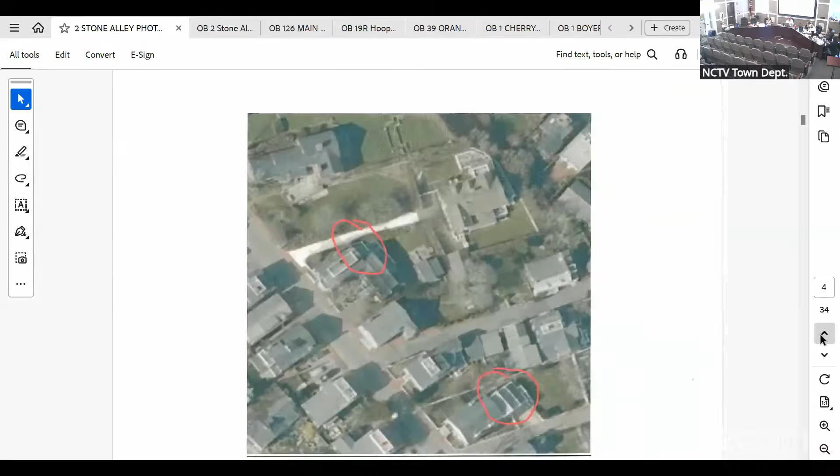I can't do anything without it up on the board, though. They've seen the pictures, it's just the plan. Well, to be clear, the elevations. Yeah, I think that's probably the other attachment. There we go.

All right, can you zoom in on that one? Yeah, there you go. All right, Linda, why don't you - there were a couple of other trim pieces that were sticking out, they had a higher profile. The piece below it that does stick out somewhat is the integrated gutter system in that back room. But we reduced the other fluffy things that were on the trim, I think that was the biggest issue. Subdued it, and then shortened the railing and set it. So that's where we are this time.

All right, does anyone have any questions for the applicant's agent? I do, Mr. Chair. Go ahead, Ray.

What was previously approved on this? Just a flat roofed element with nothing. Oh, there was no deck? No, there was a deck, but you'd fall off it. Well, huh, if you put it that way. If you weren't careful, yeah. Okay, I thought I remembered approving a deck rail up there, but I'm mistaken, obviously.

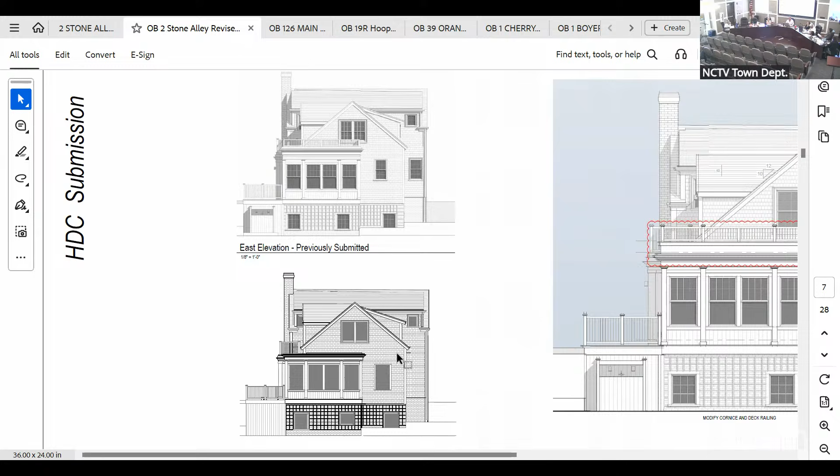Yeah, because the mock-up was actually set back from the front plane, from the east side. It was set back halfway through that flat roof deck, and nobody thought that was appropriate either. It would have looked very strange. So yep, that was the mock-up that was up there.

Okay, who'd like to express their concerns or comments, please? Well, I'll go. I seriously have driven by, slammed on the brakes, and looked up to see from Union Street what you can see of this house. It really is not significantly different at all from any other house.

This iteration seems to have a really wide band that would be white. Is that a problem? I'm not sure. It looks like 75 other iterations on the street. I guess with regard to this house in particular, maybe the best solution is just to have a parapet roof. Then it looks like a roof, you don't see any railing, end of story, they get their deck. But I am not opposed to this at all. I think it meets the criteria in the neighborhood.

Thanks, Val. Now, let's see. Ray? Yeah, I can go. Thanks. First of all, I've been walking down Stone Alley a number of times and have always meant to call or text Matt to compliment him on how this all worked out, because I, like Val, agree that after all those years, we have something I think is very appropriate to that area.

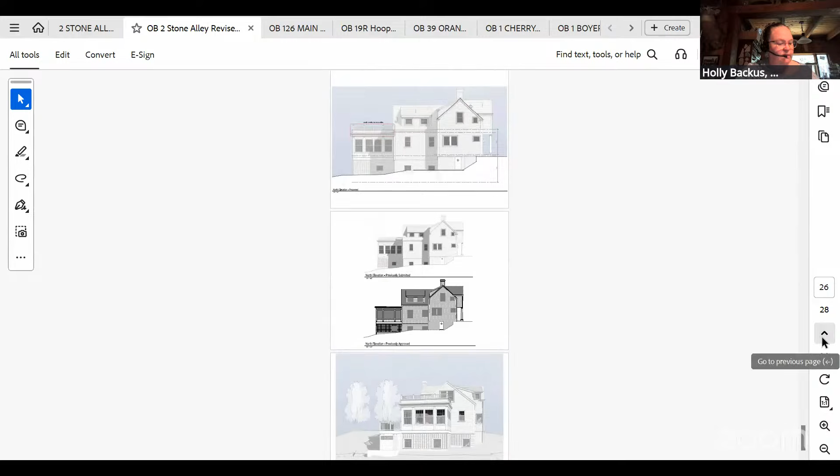Thank you, Mr. Chair. I guess I would just guide you all to look at the May 26, 2026 minutes, which I included in my comments, that commissioners at the last meeting stated that all the current options required additional refinement before the application can move forward. I thought there was going to be options provided in addition to what was provided with this revision. I specifically mentioned that the cap detail is not appropriate, per your 2024 review, back when the deck was originally submitted, and you all mentioned it was disproportionate and drawn unnecessarily as an attention, but maybe that is a moot point now. So those are my comments.

Thanks, Holly. Abby, back to you. Oh, actually, Angus. So thank you for that. When we're trying to be planned and read the comments ahead of time, and there's a large agenda or a lot of comments, you can't always remember those, and sometimes commissioners aren't able to review these beforehand, so it's nice to have the comments fresh in our minds. But one of the points is that this was basically reviewed and rejected, and I don't know why we're looking at it again.

This is something that would be character defining on the houses used for examples, but it's not this barn-come-residence. It is a character defining element, and it's a prominent element on a very unique stone alley. There just aren't very many paths like that in town, and this is definitely affecting what you're seeing there. Thank you. Thanks, Abby.

For me, it's a lot of balustrade. Is it also on the, can we see the other elevation of the stone alley side? There's nothing on the stone alley, it's all on the south side. That's already been approved and built. No, well, this face is Union Street, this elevation. And then you have it on the south side as well, right? Yeah, that's already approved and built.

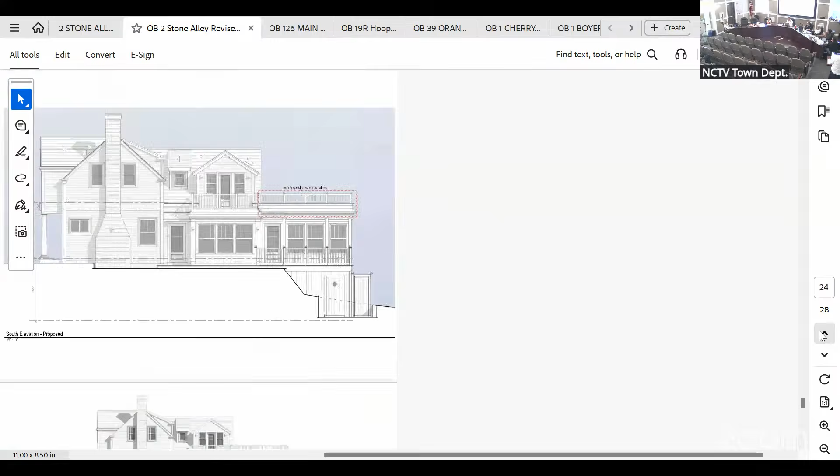Thank you. All right, can we go back to the original elevation you showed? Yeah, and can you slide over so we can see the one on the left too? It's on the left. Oh, that's a different picture. I think these are the reduced 8.5 by 11s. No, go south, go the other way. Actually, that was a good one, back down there. Matt, this is going to show us all of them. Yeah, can you zoom in on that? Yeah, a little bit more please.

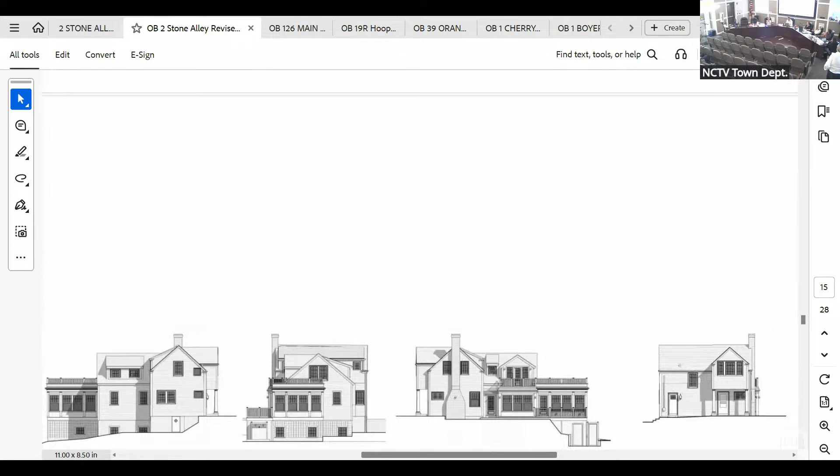All right, so if I had my druthers, retrospectively, we would have requested that the ceiling height be a foot lower and that the deck be integrated and then railed. That would eliminate a lot of the problems we're facing currently. But we're not going to go back in time, and we're not going to have you rip the roof off.

Could I just add one piece of critical information, because we actually did step it down. Yeah, so the first floor and the second floor step down two risers. I know, I knew you did that. I recall we discussed it at length. Yeah, and just a testament that, despite what you might read, the HDC process is very successful, at least a good portion of the time. It might take a little longer, but ultimately you come up with something you can go by and look at in a pleasant way and be happy that it's part of the historic character and setting in Nantucket.

But in any event, Matt, this has got too much. To me, it's taken on its own identity and it overtakes the structure with the proposed modification.

It's a lot of railing to be up there. It is, on the other hand, as Val and others have stated, something that's not, you're never gonna see this way. The only way you're gonna see this is looking up at a distance from Union Street, and closer up at Stone Alley, but I think it's obstructed by cypress, isn't it? Yeah, which, by the way, are probably the most inappropriate plant for that location.

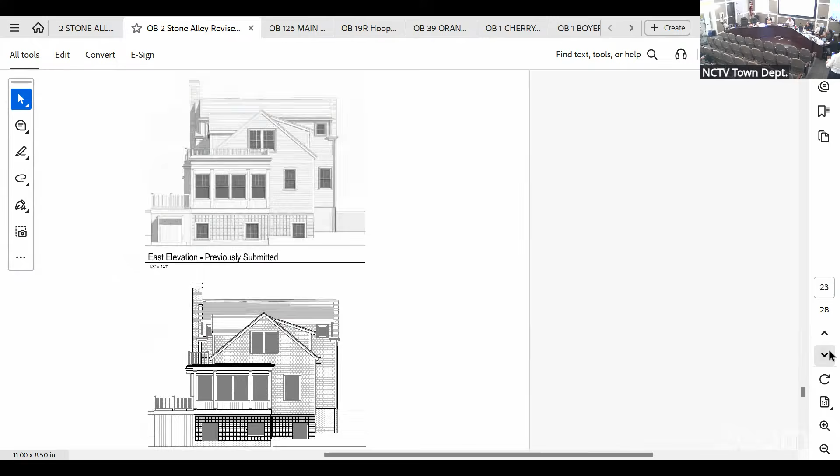Can we go, Matt, can you direct Fiona to the antecedent, the prior submission? Sure, I think it's in Linda's packet. Is that in your packet, Linda? I don't know if it's in the packet because it's in the file, and I saw it in here, I just don't know what sheet it's on. We had 3 options in there and they're not up here. I was talking about the precedent photos of others, similar, there's one, yeah, they're before this.

Go a little slower. I think we went up. I'd keep going, I think maybe.

Because I just want to point out, Steve, what you mentioned, when you're standing down on Union Street, you're looking up at it, so you're going to see a fraction of that railing. Yeah, no, I understand, Linda, thank you. Can you go down one sheet, 2 sheets? So it's not going to look as obvious as it does right here on flat.

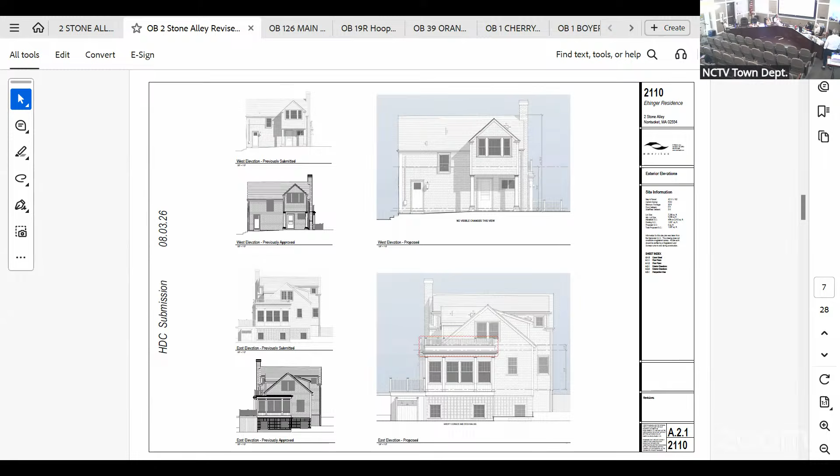And can you go to the left side of the lower 3, the smaller ones? I think that's the one I'm looking for. Oh, yeah, scroll down again a little more to get, no, yeah, keep going. Yeah, Matt, no. 2, there you go.

Matt, this one looks more appropriate to me with the breakup. I'm of 2 minds: one is that we want it to not overshadow the home. The other is that, according to Secretary of the Interior standards, it should actually not look like it's part of the original structure, in order to preserve the integrity of the character of the original structure. So I think I'm more okay with this, given 2 important factors.

One, this view is only from Union Street and it's only a portion, a sliver of it. And two, the stone alley, I would suggest, if we were to approve something here tonight or even in the future, has to have a not visible or filtered visibility at time of inspection and thereafter, and strongly suggest the applicant consider a more appropriate planting material.

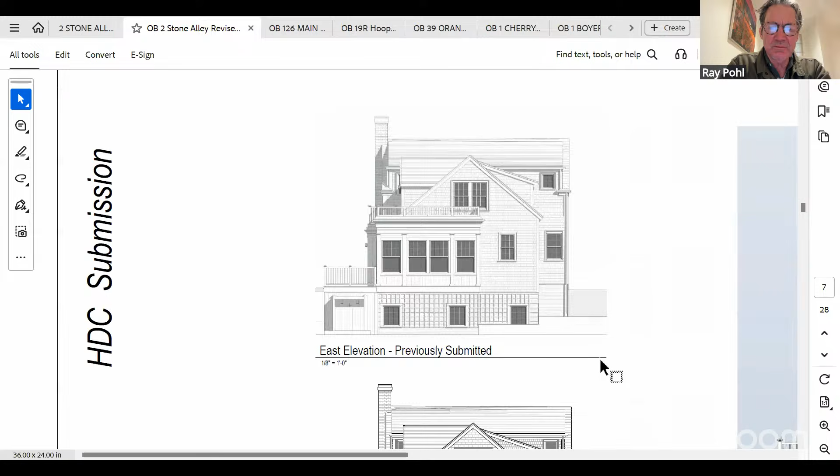up to the bottom of the baluster, is it all white, or is there shingle in there? All white, it's all white. I just think that's a lot of white, and I think there are other ways it could be handled where it doesn't need to be all white.

Could I make a suggestion? Perhaps a hybrid where we add more ornamentation but slightly increase the railing height? A combination of what Ray's suggesting and what Steve is suggesting in terms of the ornamentation — the buildup looks better in this version, but by increasing the railing height and slightly minimizing this level of detail, it might be a hybrid of the two. Just a suggestion.

Well, Matt, I think you've got consensus that it needs to be modified, and you've got the comments along the line of thought you're stating. The shadow line created by the gutter and the angle of the upper trim, I think, cannot be understated in terms of its benefit.

So can we get a motion? Can I just ask a question? Can we go to his presentation, page 10? I think it's on this page. Page 10, yeah, it's right there. So what I'm suggesting is for here to just be roof shingles.

Val, we did that and everybody hated it when we brought that in. It wasn't quite that, it was shorter than that, but it's just about mitigating the white for me.

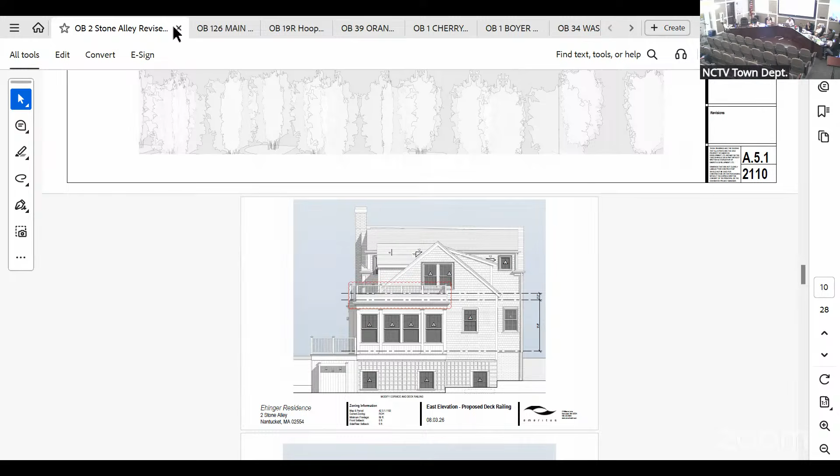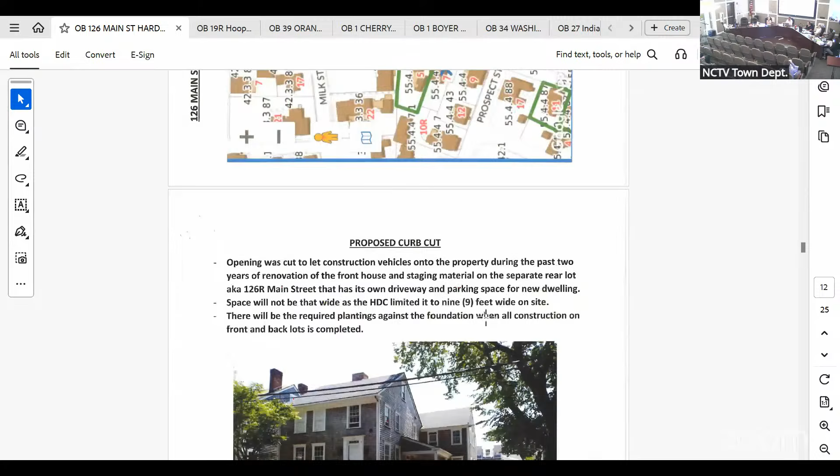Hi Chip, how are you? I'm well, thank you. Chip Stahl, representing the owner, 126 Main. We're returning after it was previously approved, and we came in with an application for side-by-side parking.

We've done away with that, we have single car parking. We listened to the commission on the last one, greatly reduced the amount of hardscape and hard surfaces. We reduced the rounding at the street curb cut from 15 to 13 feet, which is what was previously approved. We also reduced the hardscape at the top of the driveway, eliminating the cobblestone landing off the top of the stairs, the walk downstairs to the lower level. We reduced the brick landing at the entry steps, which is needed for a hard surface for usage, including since the owner has 2 handicapped people in the family.

We're doing substantial planting along the west side of the house, between the parking, to soften the appearance and reduce the wall at the town tree, which was required by the town arborist, but we reduced it to what was previously approved. We also changed from brick on the driveway to cobblestone runners, which Holly had suggested was more appropriate.

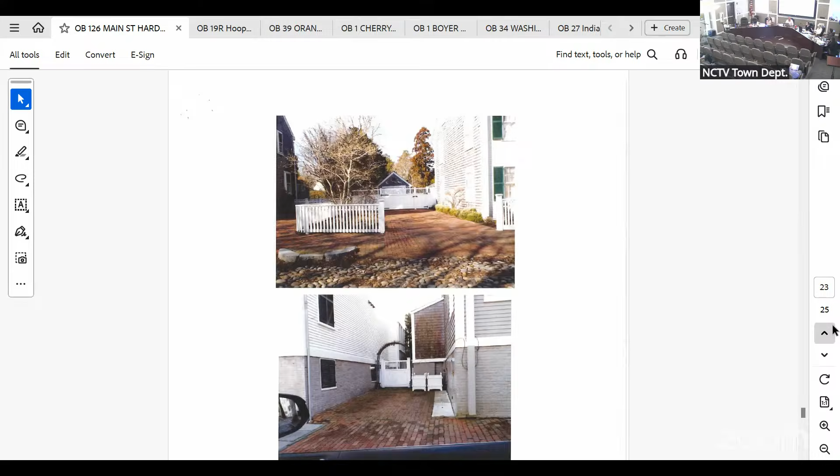I'd like to note that this is the only property, as of right now, from the bank to Caton Circle without its own driveway. As evidenced by the photos, most others have significantly more hardscape surfacing, including our abutter at 128 who has far greater hardscape for their driveway. We have a conforming lot, conforming frontage and ground cover, and it's in need of a parking spot.

We're asking for one parking space when the select board has asked for two. When we were here before, there was support for the full 20 by 9 parking space, and not the one also allowed by the bylaw of 9 by 17, which is why we are back at the HDC.

Thanks, Chip. Questions? This is Joe, I have a question. Go ahead, Joe.

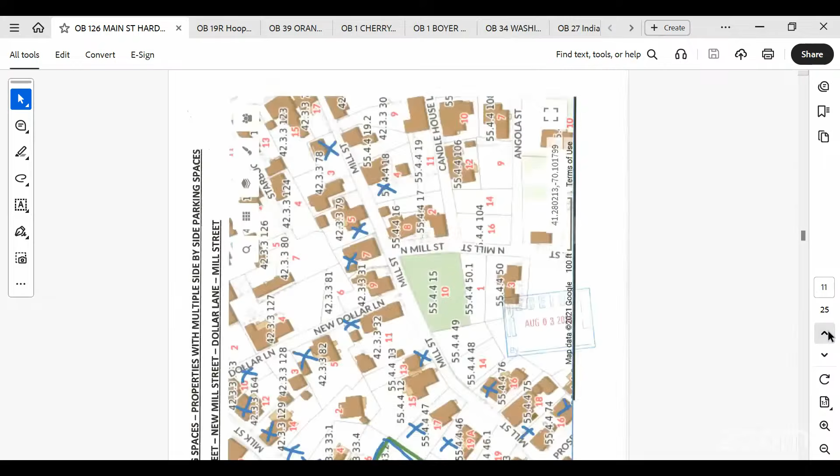I just listened to all these changes that were made, and I don't see any graphic evidence of a before and after, or anything clouded. I don't know if I missed it or not. There's one site plan here, but I was curious what the previous plan had looked like, since it had been a while since we'd seen it. Is there a before plan or not?

Hold on, yeah, there should be a before plan in the packet. It's in another packet. Yeah, there should be another one. I can tell you what that was.

There was cobblestone at the base of where the basement goes down. We took that out. The brick landing was larger, and the rounding was 15 feet, so we would have had to circle the whole thing, Joe. It is 9 by 20 instead of 9 by 17, because the select board was not happy with the fact that, even though it was by zoning, they wanted it 20 feet deep. So the forward part of the brick landing for the stairway, which is the primary entrance to the house, got smaller and shorter in square footage — I think it's like 36 square feet or something, I can't read it from here.

So we've removed some cobblestone from the house. We're going to plant between the parking and the house to soften that space, and some of the ones up there in that area are completely wide open with no softening. We also reduced — Holly made a comment about the 15-foot rounding, which is now back to the original approval, which was 13 feet. Does that answer your question?

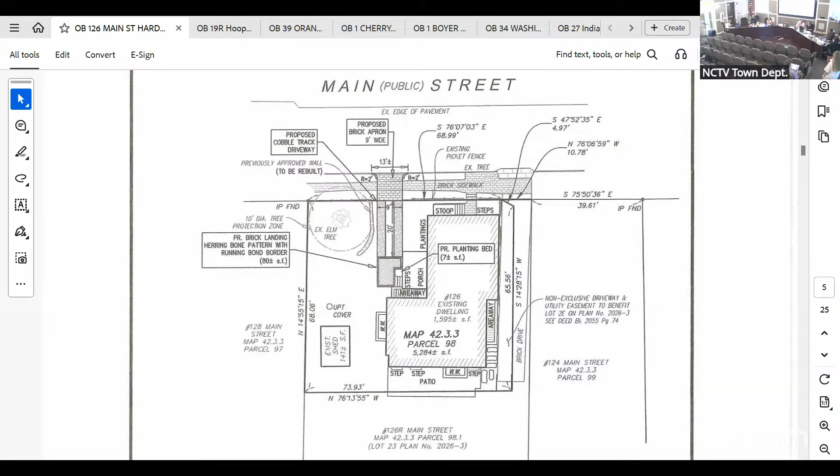Sure, I can comment. I'm looking at — thanks Holly — for pointing out that the previous plan is there.

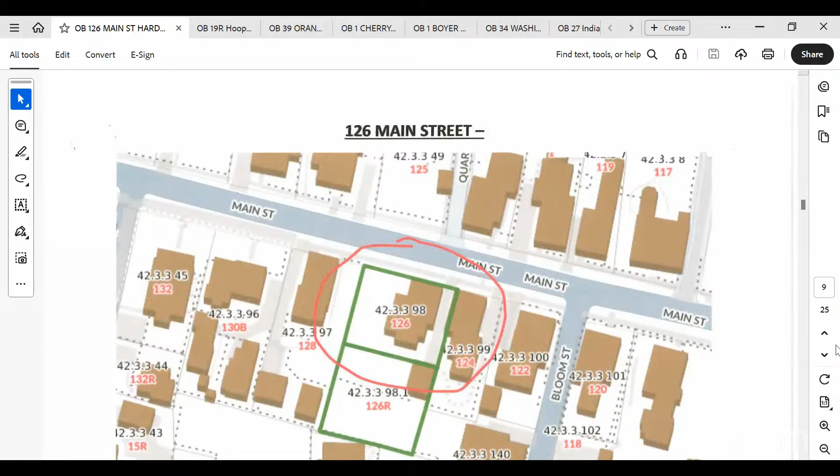I think the applicant makes a good point about the number of driveways—almost every property here has a driveway along Main Street, most of them right up against the house. The previous HDC approval has the driveway right at the house, and the current proposal shifts the driveway towards Upper Main Street, towards the town tree.

I understand there's been an effort to make sure the town tree isn't affected in any negative way. So this, I think, feels like we're going to get more green space between the house and the parking area, and of course the tree in the parking area.

So I actually think this is an improvement over the previous approval. Even though the driveway is longer, and the brick landing being as far back as it is definitely means more square footage of hardscape, I think it's only a dramatic impact when you're looking at it in a site plan or as the crow flies.

As you're walking along Main Street, the fact that this driveway is buffered from the corner of the house with plantings means the length of it is going to be mitigated, and I appreciate the cobblestones with the plantings in between. So I have come to feel that this is appropriate given the evidence the applicants provided, and it fits in the context.

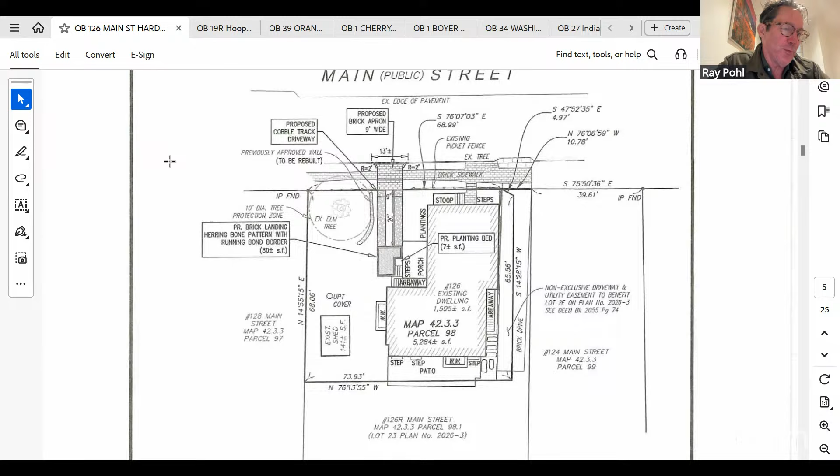Here's the board: myself, Angus, Abby, Stephen. Oh, interestingly I have 6 people listed as regular members, so that ain't quite right. Can we correct that? Yeah, let me see if I can find it. Hang on one second, sir.

I got a little overzealous with the sitting board. I have a feeling that maybe Connie might be an alternate. I have it right here: it is you, Ray, Stephen, Val, Abby, and Joe. Perfect, thank you.

Thanks, Fiona. I want to recap that: myself, Abby, Stephen, correct? Joe. Angus is the other one? No, Val. So is the agenda incorrect?

Hang on one second, let me just check. So the sitting board from what 19 Hooper Farm brought in, it was Ray, Stephen, Val, Abby, and Joe. I have from my notes, Ray, Abby, Stephen, Joe, and Connie. Let me see if that was correct -- and that's not what's on the agenda. Val was missing, I think.

I'm gonna go get some water. Hang on one second, Val was missing that meeting. That was July 28th, she was absent that meeting. Yeah, Mr. Chair, I can maybe help clarify. Oh, that would be wonderful. Thank you very much. Yes, so to reiterate what Kathy just said, Val was missing the previous meeting.

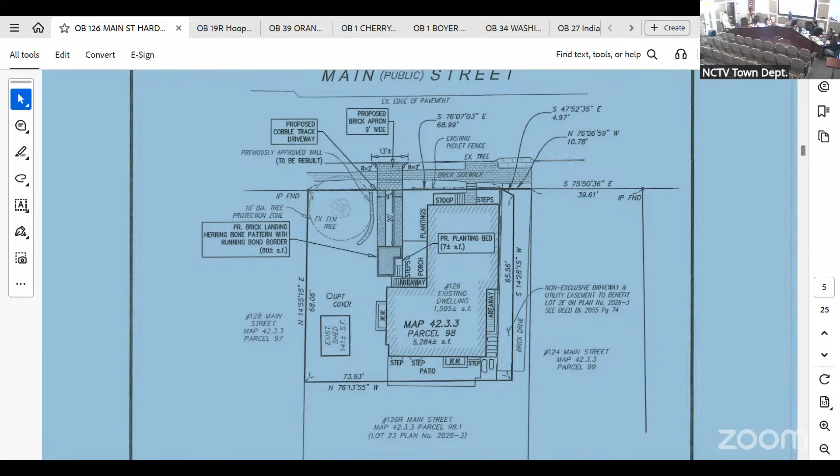Prior, okay, stepped down. Let's run with it, all right? Okay, now that we've established the board, sorry about that.

Reed, what can you tell us? I just requested to share if possible. Thank you. You're all set, Reed, great, thank you. Okay, so good evening everyone, my name is Reed Yenor. I'm here representing 19R Hooper Farm.

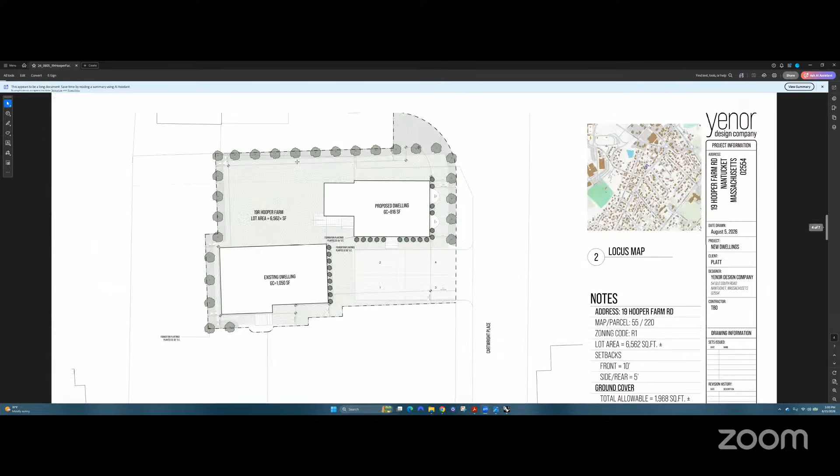Before I begin, I just want to give a little context to our submission history. This is my third time before you with this application, but it is our first round of revisions due to a request for additional information on the first round. So this is the first round of revisions you're hearing tonight, and I will begin describing the changes. In general, the commission's concerns were the building scale as well as the distinction or character of the structure itself. This is the site plan, of which we have not changed the location of the building, and I will speak to that as we discuss the other context previously brought into the conversation.

In terms of the structure itself, the revisions made are primarily focused on reducing the scale of the structure. Those include reducing the eave height by 18 inches, bringing in the dormers from the gable ends by about 6 inches, and integrating the frieze board of the dormers with the head casing of the windows, which allowed us to reduce that dormer eave height by an additional 6 inches, bringing the gross reduction to 2 feet. I hope you followed that -- I apologize if that wasn't clear. What that also does is increase the distance of the contact point between the dormer and the ridge.

The other, more aesthetic revisions made were in response to a request for an increase in fenestration, particularly on the front of the structure. Rather than increasing window size, I increased the number of windows to present a more typical 5-bay structure. The door casing was also increased to a 1x6.

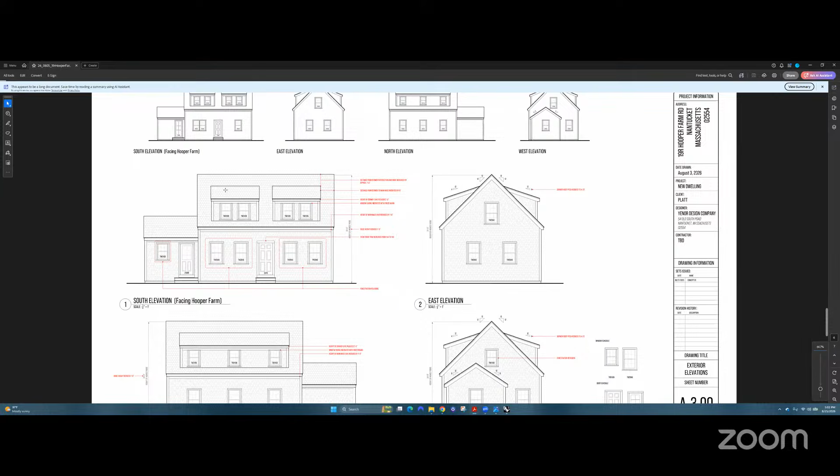We've added a window on the secondary massing, and the side door of the secondary massing has been changed to a 2-panel door with 6 lights above, as opposed to a full 9-light door. Hopefully that presents, in your opinion, a more traditional secondary door condition.

As far as revisions to the other faces of the building, they are consistent with the structural changes in regards to the eave height of the dormer, the eave height of the main mass, and the overall ridge height, which again has been reduced by 18 inches.

The other comment that was made was in regards to the alignment of the second floor windows. The windows on the gable ends were above the windows of the dormers. That has now been made consistent.

So when it comes to the streetscapes, which have been the primary focus of this conversation in this application, I want to point out a few things here. One is that there was a comment made by Commissioner Welch about questioning the orientation of the structure.

I want to make a note about Cartwright Place, considering this is a corner lot, which is a dead end. While I completely respect that that's a public way and can be seen from Cartwright Place, I think Hooper Farm is the primary concern for impact on the public way, as that's really the traveled way along the street. So with that in mind, we decided to keep the orientation of this structure because it provides the farthest distance that the ridge exists from that street, from Hooper Farm, if you will.

The structure itself is about 107 feet from Hooper Farm. If you take a look at the revised streetscape, reflective of our diminished scale, I think that in combination with the reduced scale of both the ridge and the dormer height, when considering the perspective of a 24-foot tall structure that's set back about 107 feet from a road, this produces a less impactful scale to the streetscape than if it was perhaps rotated 90 degrees and the gable end was closer to the Hooper Farm Road location, or street, if you will.

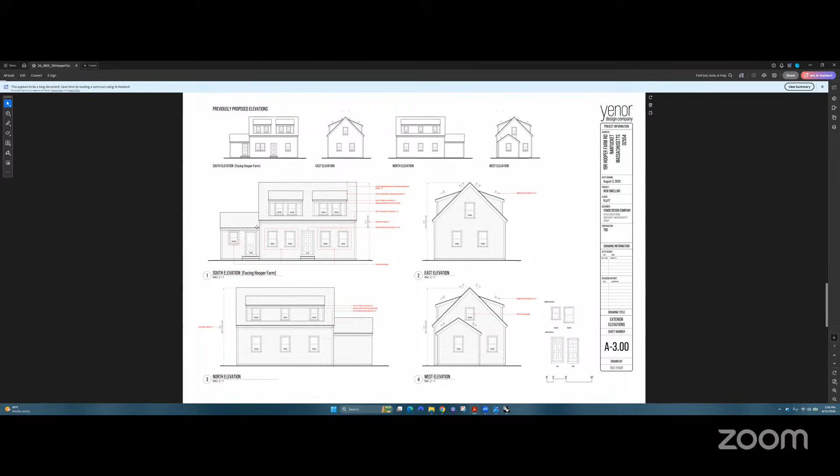The interior height is 9 feet. Part of that, just to give some context, is we have a unit in the basement. So due to utility and ductwork infrastructure, we're looking for a little bit more room above the windows to run some of those systems. So it's not purely aesthetic, is I guess my only point.

I mean, I think the aesthetic determination is up to the HDC. The aesthetic for me is that it's too tall. The concept of utilities in the basement, a deeper basement gives you more ceiling height below grade and room to run your utilities, as we all know, mechanical systems, whatnot.

Can we go back? The other thing is with the roof pitch, as the main roof pitch as it is, it's taller.

I think, look, this is a fine structure pretty much anywhere on Nantucket, including at this location, but for the density and the modification of the character. And I know that really wasn't a concern for many commissioners at the last meeting, but I would encourage you all to take a drive by the property.

And can we go back? Yeah, here. When you're on Hooper Farm Road and you drive by this, and it is not a reflection on Reed's design, it's not a reflection on the individual homes, but this looks like a very large structure with an identity crisis that's fighting to get out of a bag.

There's punching holes here and coming out here and there. It just consumes the lot, whether one is 100 feet from Hooper Farm or 107, which I think I heard 107, but it's very close to being the rear of that other lot. In any event, you see nothing but structure as you go by this. There is no structure in the foreground, structure in the background, no relief, no visual relief in the open space between the structures. It has dramatically changed the character of that neighborhood, number one.

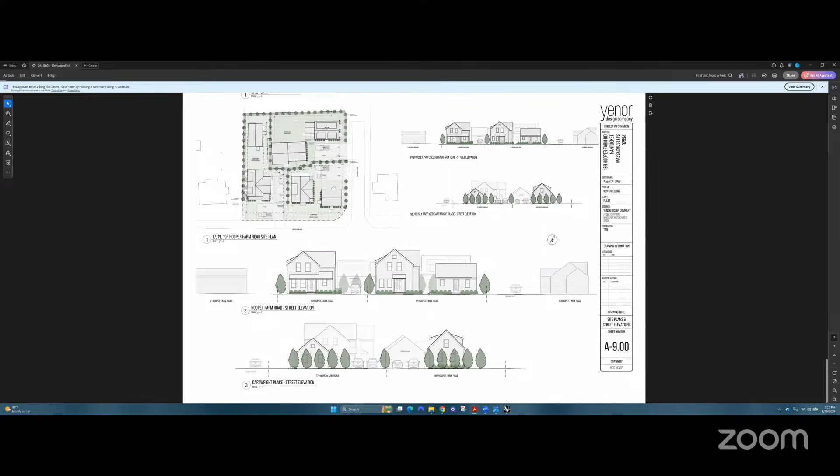I think that the scale out there, in my opinion, feels pretty good. I guess once 17 comes into play, those structures aren't up yet, but the existing ranch in the back, and then the two structures on the corner, which are now framed and plywooded, they look as bad as they'll ever look. And the scale, I think, looks good - the story and a half structure that is approved and the single story structure.

I know we're talking about the one in the back, and I was definitely in the camp that the front should face this side street here. Is it Cartwright? And Cartwright.

Driving by a number of times, it's occurred to me that the distance on this site plan between the rear of that front house on the corner and the revised front elevation of this house is enough that you actually will see this front facade as you drive down Cartwright. If the house were to rotate 90 degrees, not that anybody was necessarily suggesting that, I think it would really start to feel crowded. Now we've got some breathing space, and you'd see a front door, but you'd see the building obliquely.

With the building in its current orientation, as you go down Cartwright, you're actually going to look in and see the front of the building. Those definitely exist in town on Cliff Road - there are some buildings that are rotated to the street, and you get a glimpse down into the front of the building, which, by the way, I think has greatly improved with current revisions.

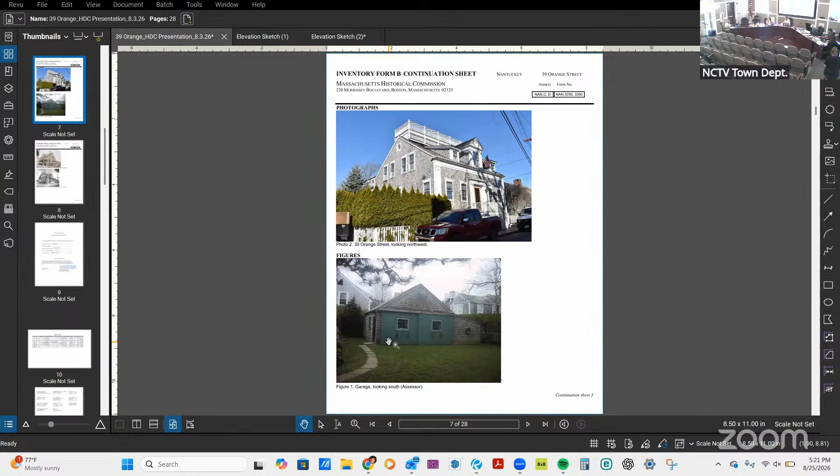While Matt is getting set up, I had a couple of comments or questions. Today I was wondering, and I couldn't get a succinct answer: what percentage of a structure needs to be saved to make a distinction between a demo and an addition, restoration, or alteration? We couldn't find that information anywhere. I reached out to Kathy and she couldn't find any either. So that's just one question at the beginning of this, but we read Holly's comments, and Matt and I discussed some possible changes you might like. We'd like you to look at the presentation with him and discuss it, and at the end we'll show you perhaps what may be a solution. Mr. Chair, maybe Holly knows the answer. I didn't know if it was about tonight's agenda. It's a seriously good question, I'd love to know the answer myself.

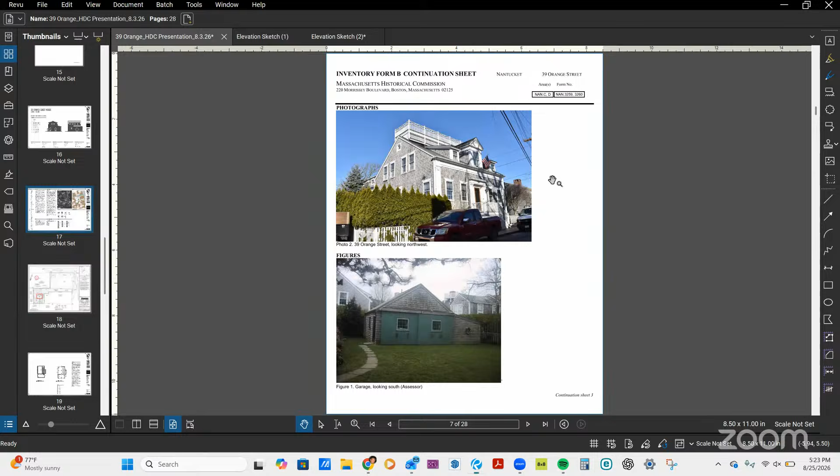From our last time here in front of the board, there was a lot of comments about trying to bring in some of the existing architecture of the historic barn. So we took those comments to heart and want to show you the updated exterior elevations and where we landed on that. The first thing we did was update the window designs. The existing barn has really small divided lights and is all casement or awning windows, so we updated all the exterior elevations by getting rid of the double hungs and incorporating smaller 24-light windows as casements or awnings around the facade.

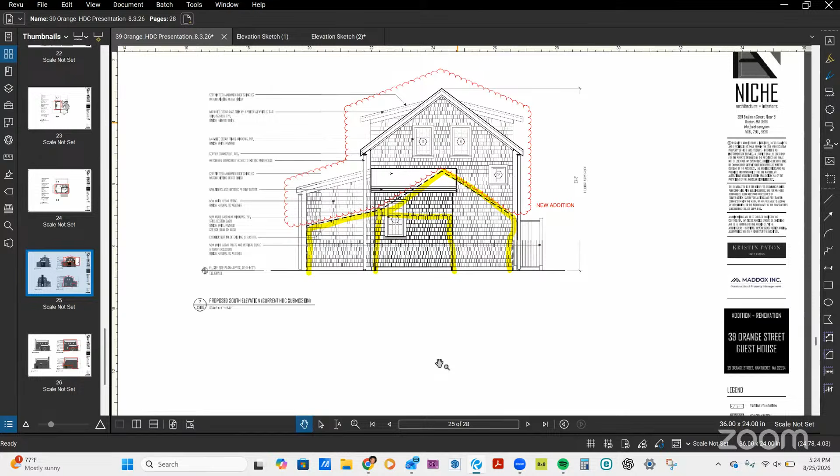Previously on the south facade, we had an exterior chimney and French doors on either side. We took the staff comments and removed the chimney, moved the fireplace inboard so there'll no longer be a masonry mass on the exterior, and replaced the second floor smaller windows with the 24-light casements as an homage to the barn window styles. Down below, we took the French doors and again incorporated those smaller lights, and replaced the chimney mass with a trellis system. One additional note we took from the original barn was we wanted to match the existing rake and fascia details, as well as incorporate similar overhangs onto the facade.

You can see on the exterior elevations, one of the comments was trying to illustrate what is existing to remain versus what is proposed, teeing off on Val's original comment about the percentage between what is considered a demo versus an addition reno. On this front facade, just this little corner would technically be a lower portion of the wall that could be retained and built on top of. The front addition will obviously be all new, so that's what we're looking at here. And then we are raising the top plate of the original lean-to, which is the space being shown above here.

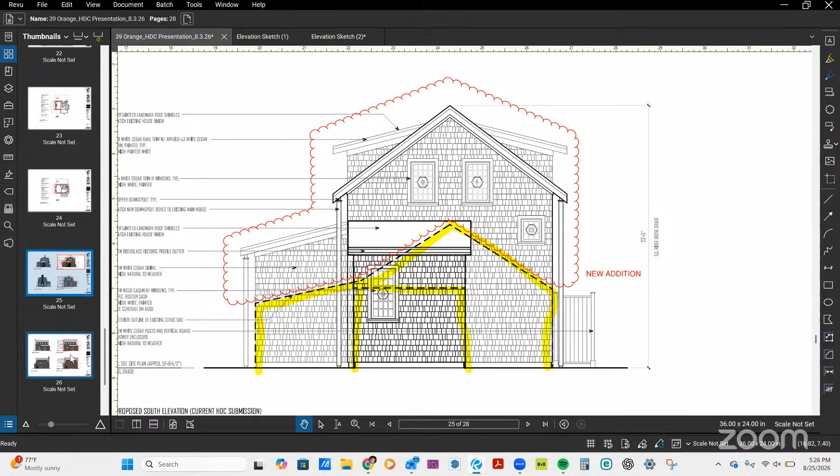We were hoping this would be seen by the board as a good contribution to bring the barn back into the new structure. Later on, we were corresponding with Val on some additional ideas to sketch through and possibly incorporate, like bringing some of the original windows back into the carriage style barn doors in the lean-to, and lowering the pitch and top plate on the roof to get rid of the shingles above the proposed windows, which we're happy to do.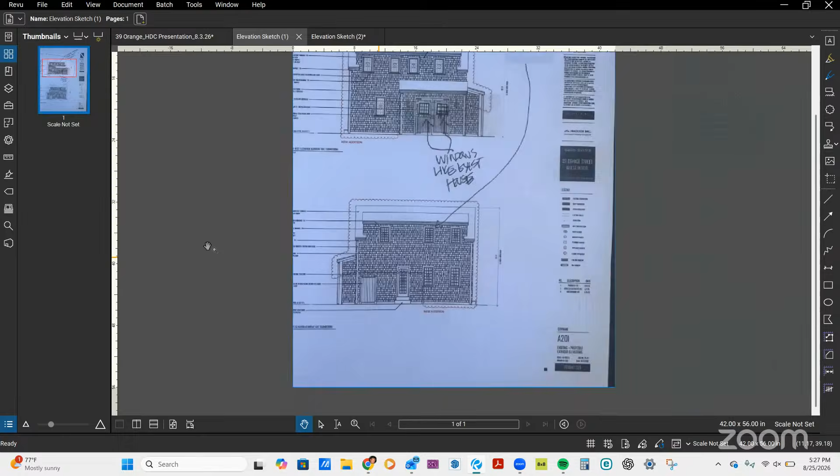On the other two elevations, one interesting thought the board had too is as we build out the addition, we were curious whether incorporating trim or some kind of massing element as an homage outline to the original barn into the new structure would appease the board, so as not to completely lose the character of the original barn while still having that homage to the facade through a detail like that.

Val, is there anything else you would like to add?

Well, I was thinking that main gable mass from the barn could maybe become a porch or an overhang in front of the facade, and try to reuse some of the barn door in front of the French doors in some way, keeping a piece of the original shed. That's the only side you could possibly see, which I don't think you can from Plum Lane.

Yeah. That's it. Okay, thank you.

Kathy, is there anybody with their hand raised? I don't see anyone. No, I was just being proactive. Oh, okay, all right, just curious.

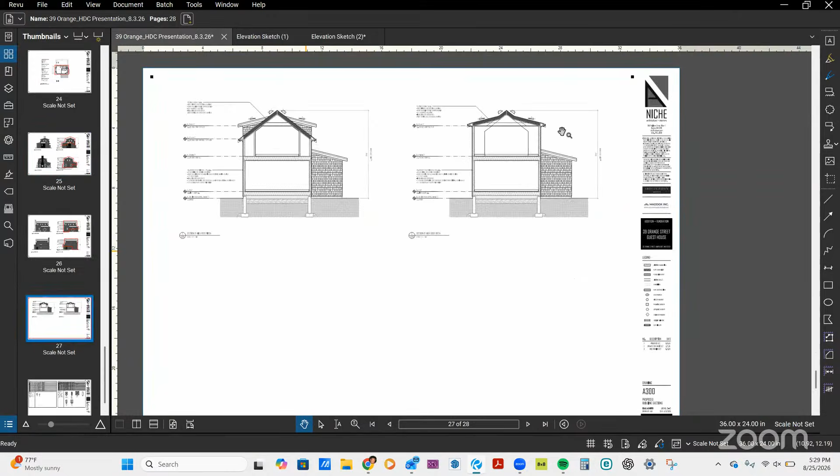The overall height of this structure is 23 feet 5 inches. Okay.

And did you reduce that? I didn't pick that up in the comments, I apologize if you stated that. No, so we received one of Val's comments later, and it was mostly about reducing the height to get rid of the shingle course above the window. So we're happy to do that, and that'll bring it down 6 to 7 inches.

Just to be clear, you're happy to do it or you did it? We have not, it is not being reflected in the drawings, but we're happy to do it as a revision. Thank you. And can we go to the site plan, please?

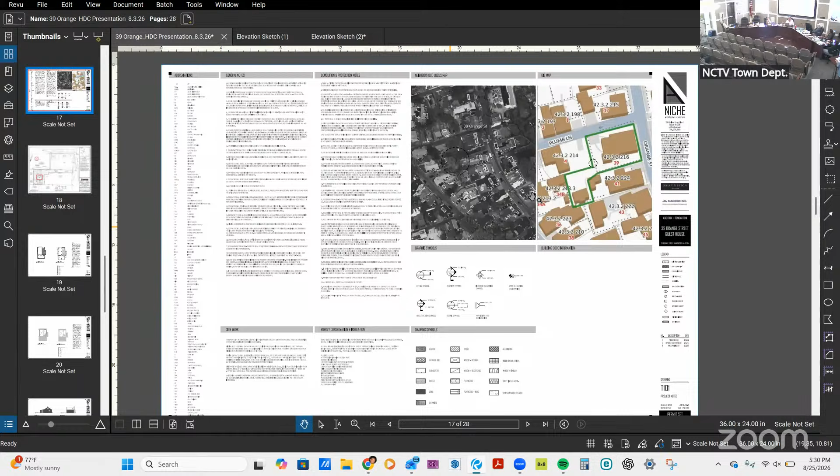Of course. The locus or the site plan? Why don't we start with the sheet and then the site plan. Do you have a drawn out plan showing the proposed location with dimensions? There we go. I thought I saw that in there.

Okay, yeah, so I think, what the hell, 7 inches off the top, and I'm good with it. I appreciate the changes, thank you. Okay, Stephen, thank you. Who's next?

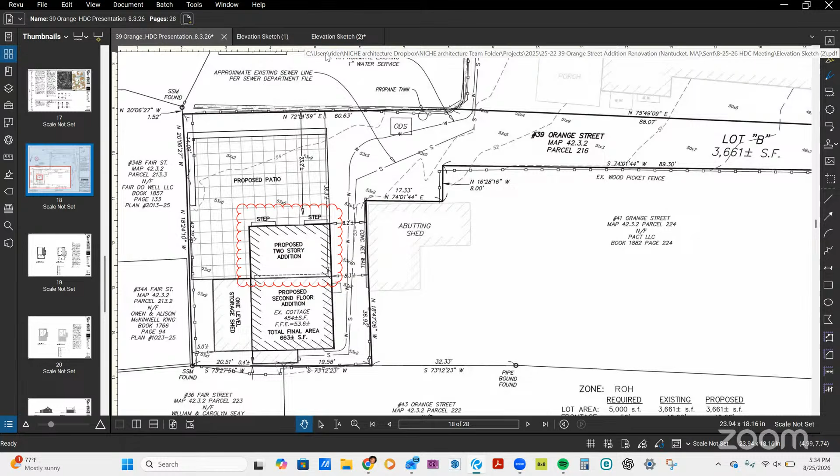I'm not sure what the visibility is of this. It sounds like it's minimal, but I think Angus makes a great point. If we have a historic structure and you can't see it, does it exist? Well, I would say that it definitely exists. I think taking an approach where you're working with the existing conditions more would be appreciated.

For instance, even something as simple as what's labeled as the shed, that little lean-to, does that really need to change? Maybe it comes up 18 inches because it has a foundation under it, but that portion of it seems like it could remain. The outline of it looks really small here, but the photographs make it look like it's taller, so it might just be deceiving.

I do think that generally the approach that this should feel like an outbuilding with more utilitarian detailing, versus emulating the details of the house, is appropriate and on the right track. I do think that there's some, and this might be a little nitpicky, but the rake board trim on the dormers and on the lower pitch just feels heavy compared to the trim on the main gable. The dormers are, I think, 3 pitches, which feel really flat, and the proportions of that just feel off to me. I appreciate that there's no chimney on here.

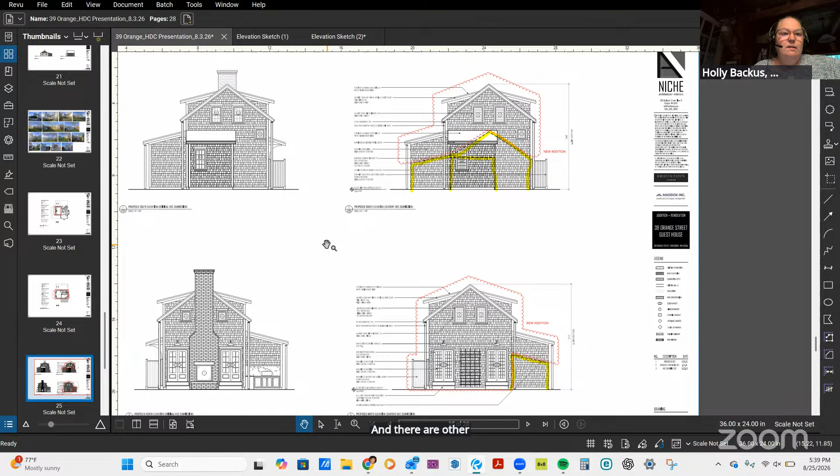And I appreciate Joe's comments, because this is a demolition. This is something that obviously you all have taken to heart and requested information on. And there are other places that dive deeper into definitions of demolition with percentages. Our special act doesn't get that granular, nor does Building with Nantucket in Mind.

I hope maybe we can dive into this a little bit more, which we will. Thank you. Okay, thanks, Holly.

So, yes, this is a demolition, and I don't see anything on this that pays any kind of homage to the existing building. I believe most of the board members feel the same way.

Can I ask a question? No. Okay, hang on, please.

Beyond that, I think if this were a new build and we weren't even discussing whether it was a reno of an old building or a new build, I question why are there 12-over-12 windows, no corner boards, 24-light French doors, windows that are incredibly small in relation to the wall planes they're set into. Why, to Joe's point, do we have these super massive trims on the dormers and very plain trim on the gable ends?

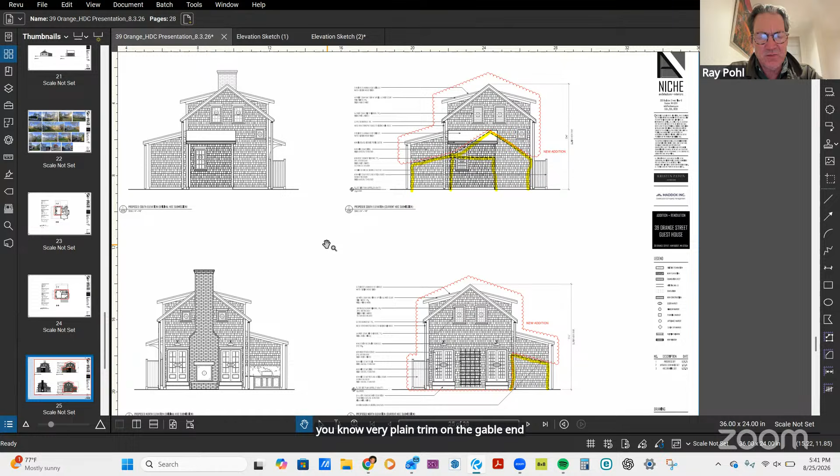I just don't think that this has really been thought through very well. That's it for me. What do you folks want to do? I just have a question, Ray. Yeah, sorry, go ahead, Val.

Was any of the ideas that I gave him, that we showed you, the very brief sketches, working in the right direction?

Okay, Val, go ahead. I'm just asking, is this a direction I'm trying to point Matt in that is a better approach? Yeah, okay. So I didn't say anything about that.

Like this little silhouette of the existing building, I don't think is right. I think somebody said, well, why are you raising up the little L on the side? Why is that getting raised up and why doesn't it stay the same height? Keep it as a porch. And these are my comments. These are not board comments.

Does anybody have anything they want to say with respect to Val's question? I do. I could. Okay, Stephen, go.

I think, as I was speaking on the structure earlier, there's relevance and it's appropriate. I think if this is what's going to be proposed, this should come back as a move-off demo and then an application for a replacement structure, number one. Number two, can we just get a comment on the visibility of this structure?

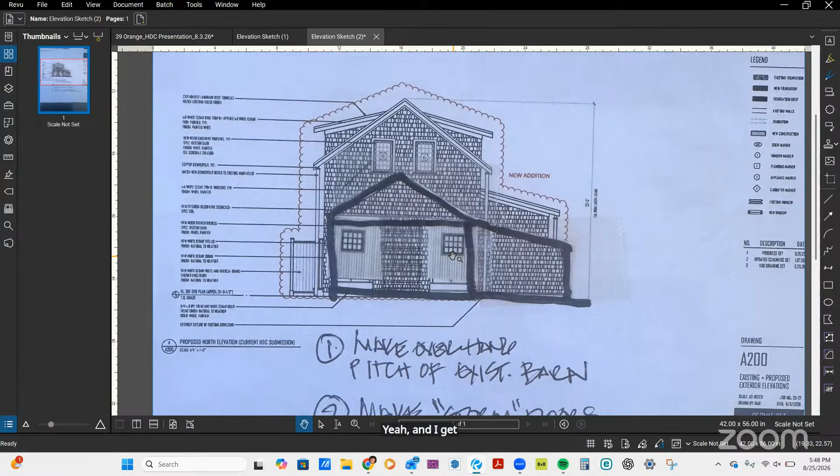Okay, well, it's at the applicant's discretion, what we're talking about right now. It really is. But a motion just to more accurately recharacterize the application, I think would cover all the ground that both of you are talking about, without giving them a specific approach they have to follow. Okay, well, I would amend it accordingly. Is that your motion, Joe?

Yes, Mr. Chair. Okay, on the motion: Angus, aye. Stephen, aye. Connie, aye. Joe, aye. And myself, aye.

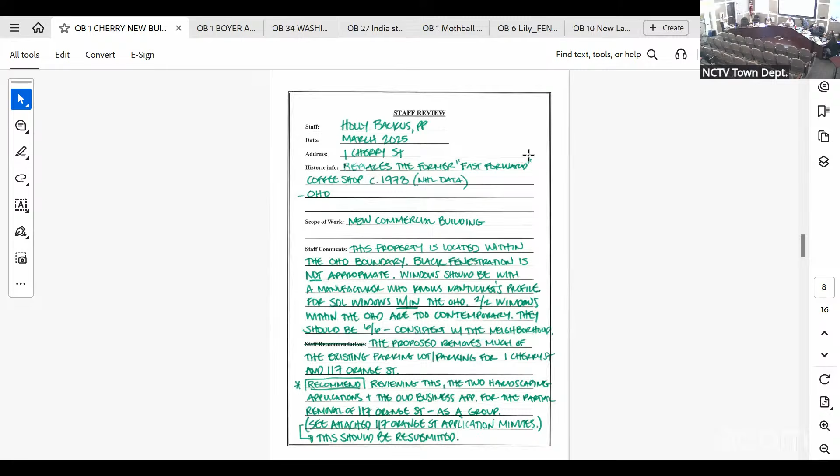Myself, Abby, Angus, Connie. Ethan's not here. All right. So Mr. Chair, Isaiah Truman is representing this project, not Ethan. Okay, fine.

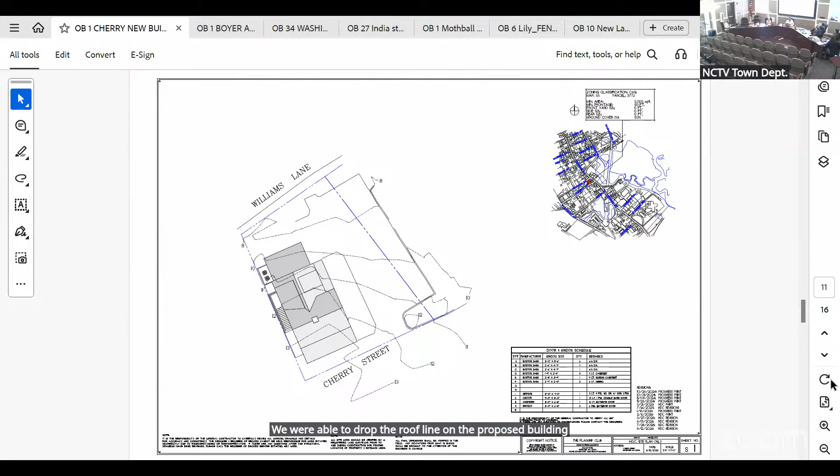Okay, well, thank you guys for hearing this this evening. Since our meeting 2 weeks ago, we made the changes you requested. We were able to drop the roof line on the proposed building a couple feet. We changed the dormer on the front, or the side, from a doghouse to a shed dormer as requested. And we added one of the decorative windows on the gable end there. Those were the 3 changes requested.

Thank you, okay, Isaiah, thank you. Let's see your board. Myself, Abby, Angus, Connie, correct? And, yeah, Joe. Oh, never mind, yes, you're right, 4-person board, right? Yes, yes, correct. Okay, who's ready to begin?

I'm happy to start. Thanks, Angus. This is really starting to take shape.

I appreciate the changes. One of the things on the east elevation, I appreciate the switch to a shed, but it is a flush dormer. There's maybe just a piece of trim that separates the dormer from the wall below it. I had suggested last time continuing that roof, the main roof the dormer's on, all the way to the east wall eave, which will make the dormer feel like it's set back, keep the program up above it, and simplify the structure more. I think the additive massing of the garage really does help bring down that gable facing north to Williams.

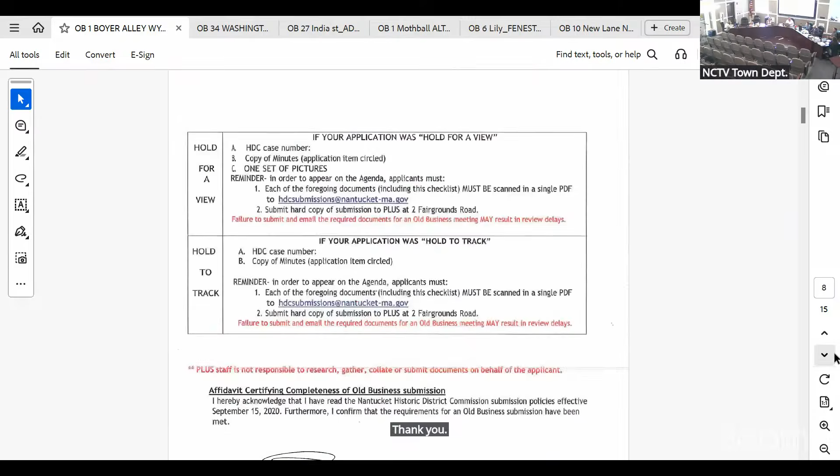So, One Boyers Alley, do we have representation? It's gonna be a second. It might just be a second. I'll go ahead and give you your board. It's myself, Ray, Abby, Val, Connie. And if we need an alternate, we've got Carrie and Joe.

Fast, it's already up. While we're waiting, Holly, are you still with us?

Yes, sir, I am. Could you please provide your comments before we head into this? Hopefully Ray will join shortly. Sounds good. Thank you, Mr. Chair.

This is an existing 1970s duplex, and it was part of the Perry cottages back in the 60s, early 70s. Appreciate the reduction in height to the ridge from 29 feet 6 inches to 27 feet. Even with that reduction, it's still a very large volume that's being added.

Commissioner Oliver mentioned that there is, quote, nothing in the area of this stature, and that the quote east fenestration is overly exuberant, end quote. I think there should be a proposed streetscape from both Boyers Alley and Pleasant Street. Both of these roads are historic. They predate our historic district and are both shown on the 1834 Coffin map and the 1858 Walling map. And of course, that's part of the commission's purview.

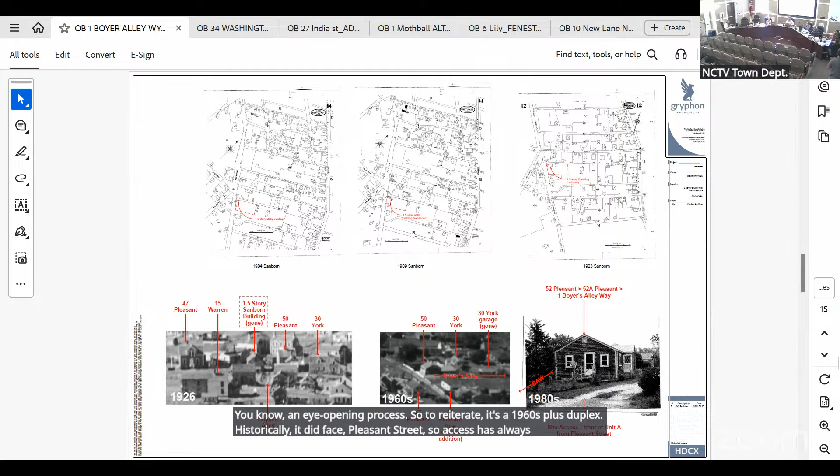So to reiterate, it's a 1960s plus duplex. Historically it did face Pleasant Street, so access has always been off Pleasant Street. And as part of the Sanborn survey, Boyers Alley's been on the map forever and still exists historically as a sort of utility, true alley. So there are no front doors, if you will, that are on Boyers Alley. It's a utility type sort of way.

Additionally, to Holly's point, we included a plan that outlines the changes we're making to Unit A, which is the Pleasant Street side. Unit B is essentially unchanged. We're removing a deck, but essentially all our work is focused on Unit A. We're really preserving all of the footprint of Unit A, we're just adding on to it.

One thing I'd also like to point out in regards to the height: the existing structure is about 32 to 34 inches above grade, so it's elevated to begin with. So our structure is fundamentally higher from a ridge height to grade because of that. But by reducing the massing to 1.5 stories, which you see on the screen in front of you, it fundamentally has the stature of a house that's much smaller. But again, we're starting at a higher height, and that's just the reality of the existing structure.

We have attempted to mitigate that, particularly on the Pleasant Street side, by lowering the entry door. That door is where we have the stair, so we're able to lower it relative to the floor height, so you take a couple steps up before you get to the main level. But again, it's something we're cognizant of, and we're working to mitigate that to the best extent possible. So to address the board comments from the last round, we went from 2-story to 1.5 story massing. The windows previously were SDLs.

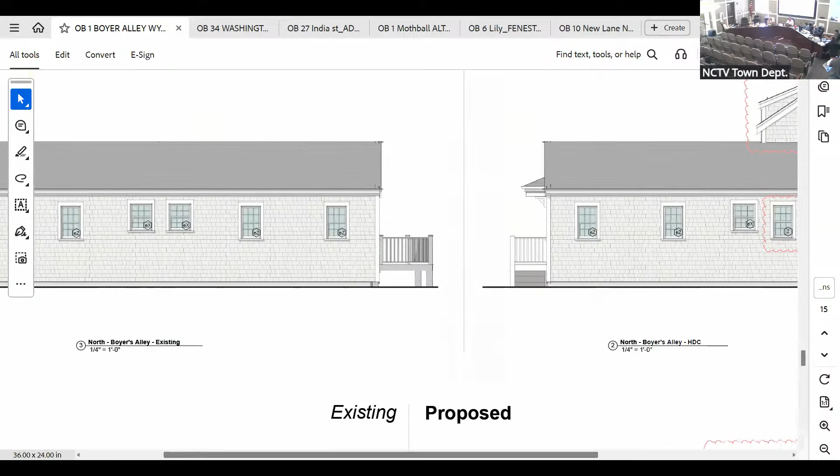I generally agree with what's been said, Mr. Chair. It would be wonderful. I appreciate that it's come down, but I would love if it would possibly come down a little bit more. That's about it for me.

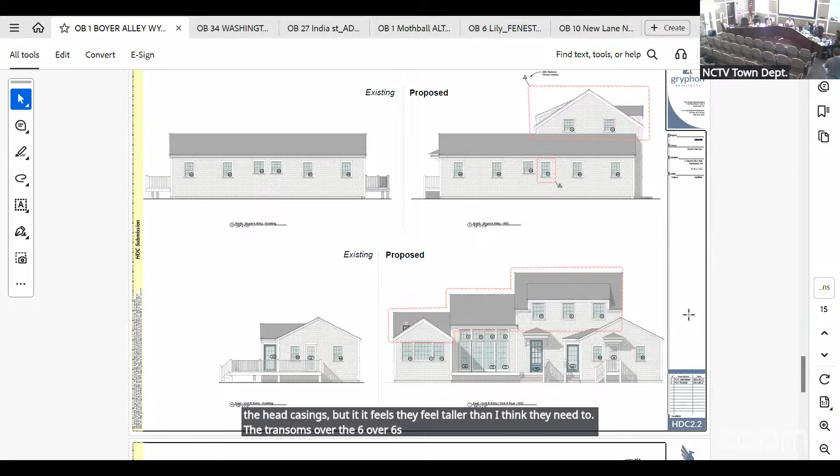I agree about the 3 dormers. It looks like the main roof could come down, the eave could come down to the meeting rails of those windows, and maybe they could be sheds instead of gables, or the gables can drop so the rakes are touching the head casings, but they feel taller than they need to be. The transoms over the 6/6s seem out of character there, and that eave seems high. Bringing that down, I think, would help. Those are my concerns.

Can I make a motion to hold for a few more revisions? You can. On your motion, I'm an aye. Val? Oh, sorry, Ray?

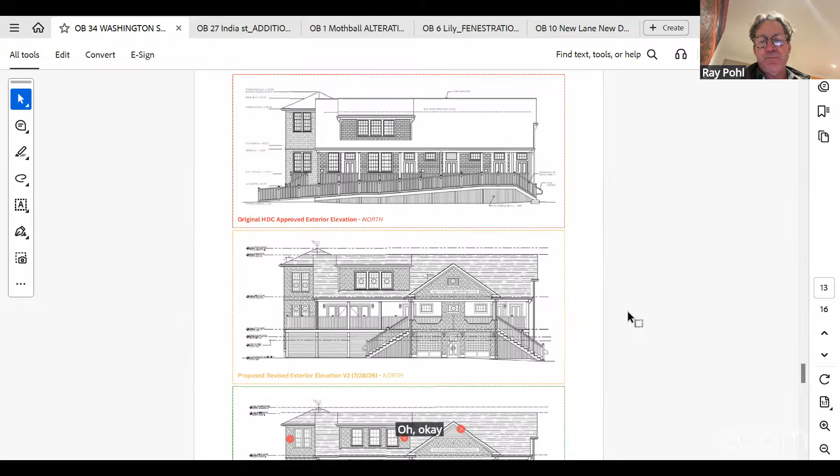Sorry, continue. Yep, starting on page 13, we've outlined the three elevations from the different submissions. At the top of the screen you'll see the original elevation that was approved back in 2020. The one in the middle in yellow was the proposed revision to that approval that we were here last on the 28th of July. And on the bottom is what we're proposing today as the revisions based off the comments we received from the commission.

I'd like to walk through each elevation face just so we can point out the changes we made. Overall, our takeaway was to simplify the ornamentation that was brought upon by the revisions we were required to implement because of some of the value engineering changes we made from the 2020 design.

So I can walk through them starting with number one. We simplified the skirting around the main porch and around the entire building by going with one singular approach — a vertical cedar slat all the way around. We removed the lattice work that was around the lift underneath that gable, and maintained one consistent approach to skirt that.

Number two, we spaced out the ganged windows that are at the shed dormer, and then we abutted those windows to the frieze board as originally shown in the 2020 design.

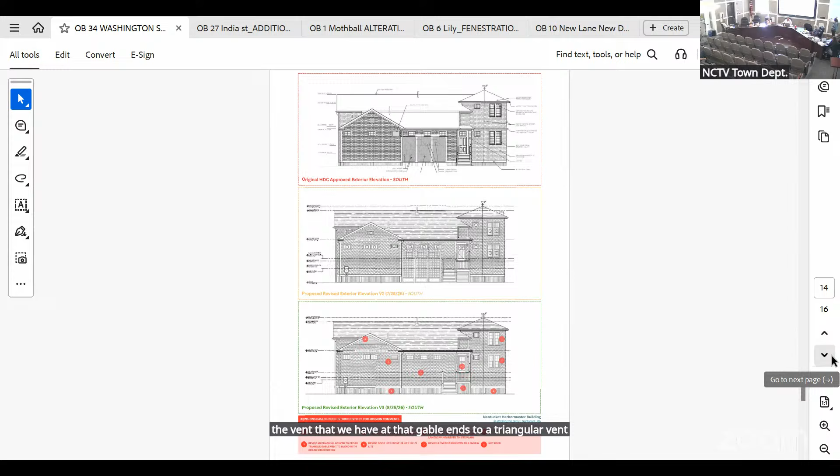Aside from the window changes I discussed, going to 6/6, and changing the vent at the gable ends to a triangular vent in cedar, those are primarily the changes that happened here on this elevation. Thank you very much.

Oh, that's it? I just have the other two elevation faces I can go through.

On the next page, the west elevations, the primary change is that windows that were previously ganged together, we separated in order to align with the windows below, just to provide some uniformity between the first and second floor. And then we changed the skirting around the building to vertical.

On the last page, the east facing elevation, primarily other than changing the skirting and the windows, there was a comment about introducing a window back above the doors. Because we had to reduce the ceiling height levels on both floors, we weren't able to re-implement a window there that would align with the other windows the way we needed. So our solution was to introduce a sign on this side of the building to fill that empty space created above the entry.

So those were just the changes that were requested, in addition to the rendered elevations that were specifically requested, which we have and can reference as well. That is all, thank you.

Okay, thank you. Any questions for our applicant, or if not, we can move forward with discussion.

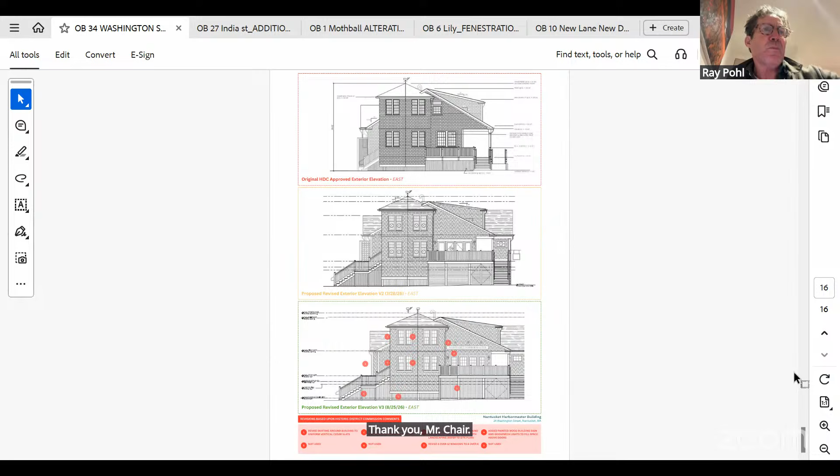Thank you for the changes. A couple things have come up. One is that I'd like to see something that says, I am the front door. There's sort of a blankness here where you don't really know where to enter.

Another general comment is there's a typical Nantucket window dimension that's rectangular, 6 over 6. The windows you've proposed just seem a little off—those panes are a little too square, not enough Nantucket. I find that also in the tower; I'd like to see a 6 over 6 typical Nantucket window in the tower.

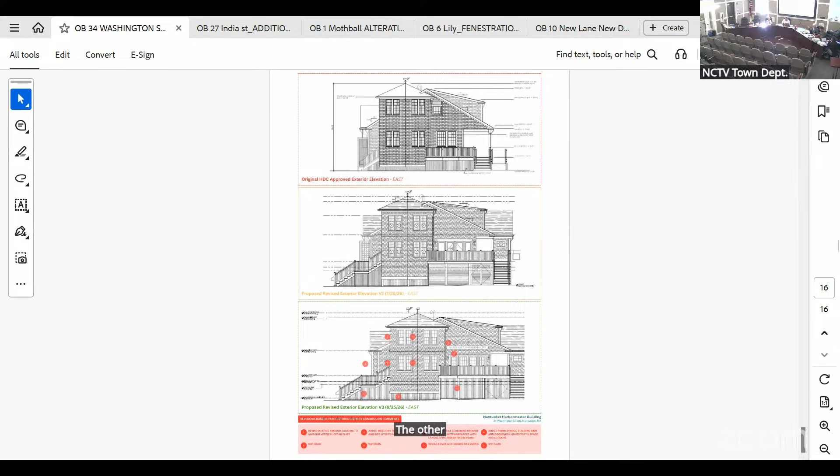The other thing that I don't think's been addressed is that the eave forward of the main mass bisects that tower in a way that cuts it off. I don't know how you remedy this, but you might want to decrease the dormer so you can bring that roof away from the tower, so it doesn't bisect it so harshly. Do you know what I'm talking about?

Can you refer to what elevation you're seeing that on? It's on the front, right here. Is it the overhang of that roof, the way it bisects the tower? If this were brought in, you could see more of the tower. It just looks like it's in front of it. The tower, I think, is one of your defining features, so I think the eave now seems in front of it, and the tower is kind of cool, so I'd like to see more of it.

I would like you to address a front door, and maybe some typical Nantucket window fenestration on the first floor, so that it might ground it a little bit more. But thank you very much.

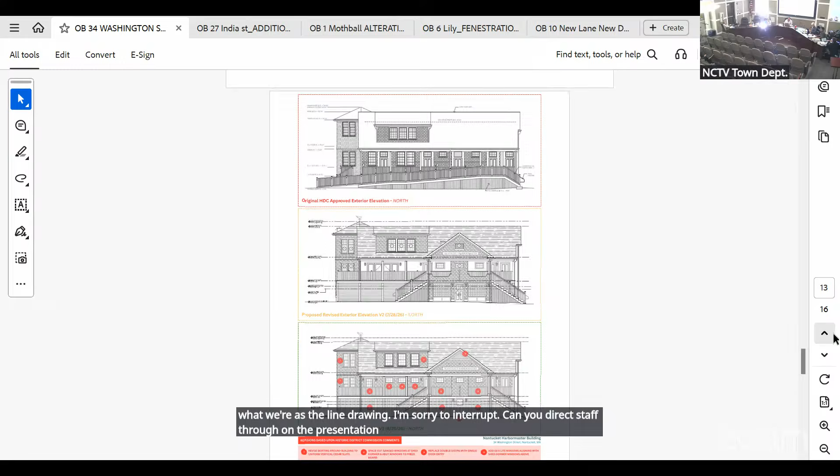On this document, page 7 is the revised rendered elevation that we propose, which is the exact same as the line drawing. I'm sorry to interrupt, can you direct staff through on the presentation? What slide is that? Page 7 and page 9 are the revised rendered elevations. Okay, and that's what I believe I'm looking at now.

Are these a line for line replication, or is there artistic license here? No, these are line for line.

And then I have to ask, is there an elevator? A lift, yes, a chair lift for ADA.

Okay, so I appreciate looking at these. Can we zoom in a little bit? I want to address a couple things Abby mentioned because I think they're important and relevant.

Your fenestration units basically require one more column of lights, and then you'll get the more accurate Nantucket typical proportion in terms of height to width. You may have to adjust the height of the windows a little bit in order to make that work. I think the modification of the dormer windows, bringing them up into the top plate area, and then modifications to the windows on the tower, that's very successful. You didn't have to change the dormer height or therefore the usefulness, so that's good for the facility, but at the same time, aesthetically, it's much more appropriate and typical.

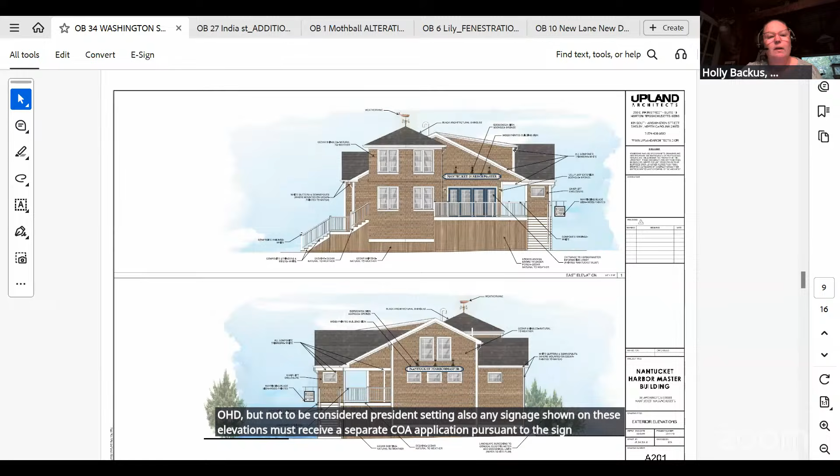Thanks, Holly. Jonathan, I'm assuming you're aware of the sign guidelines and that you're going to need to apply separately. Yes. We felt it was important to show for purposes of just understanding where they would be, but yes, we understand. Well, I think we all appreciate that.

So can somebody give me a motion? Yeah, I got a couple quick questions though first, Mr. Chair. Sure, Stephen, go ahead.

Jonathan, I think you're familiar with our Exhibit A process. An Exhibit A basically means that a drawing gets marked up, and that is the equivalent of not having to turn in additional drawings. That's what the approval is based upon. The drawing can be supplemented with that modification to conform to the Exhibit A. The point I'm making, and I only bring this up because timelines have been brought up, is that the Exhibit A is what can be attached to the COA, and the COA, the certificate of appropriateness application, then becomes a certificate of approval for purposes of a building permit.

Okay, so given that, I understand the sensitivity of deadlines. I think it's incumbent upon us to state that we can't be put in a position where another board's timeline or construction documentation and drawings and design are forcing the HDC's hand. It's a one-off, it happens, and I think if we as a commission can accommodate that, we should try to.

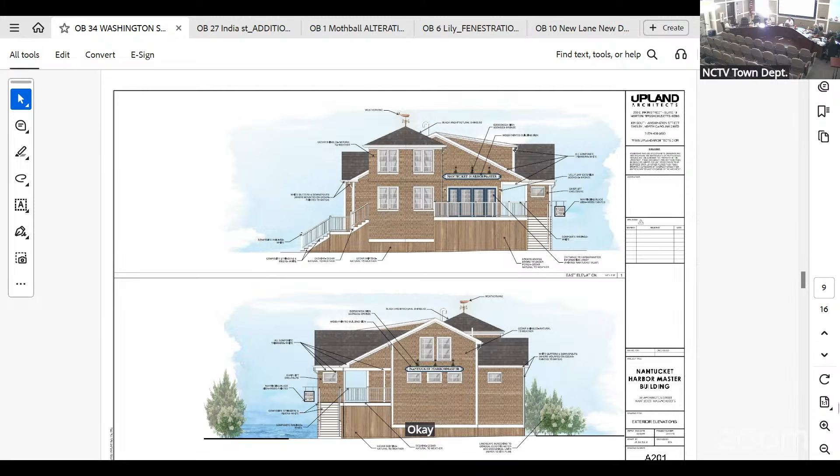Just trying to keep the costs down, that's all. Are we square on the motion yet? I think so. Raise the freeboard, eliminate the corner boards, adjust the windows.

And all this is being encapsulated in an exhibit A, correct? Will be my pleasure.

Okay, so on Stephen's motion for an exhibit A, let's see: Angus, aye. Abby, I'm not sure, I'll come back to you. Stephen, aye. Connie, aye. Abby, I'll be a nay. So that motion, and I'm an aye, carries 4 in favor, 1 opposed. Thank you, everyone.

Is this 27 India or 21? Oh, 27. Okay, and Angus, you're chairing this. Sorry. Thank you.

Uriah, are you gonna be screen sharing? Go ahead and take it. Take it, yeah, thank you. Thanks though, Val.

Okay, so next is 27 India. The board is myself, Ray, Abby, Stephen, and Connie. Do we have representation? Can you hear me, everyone? Yes, please go ahead.

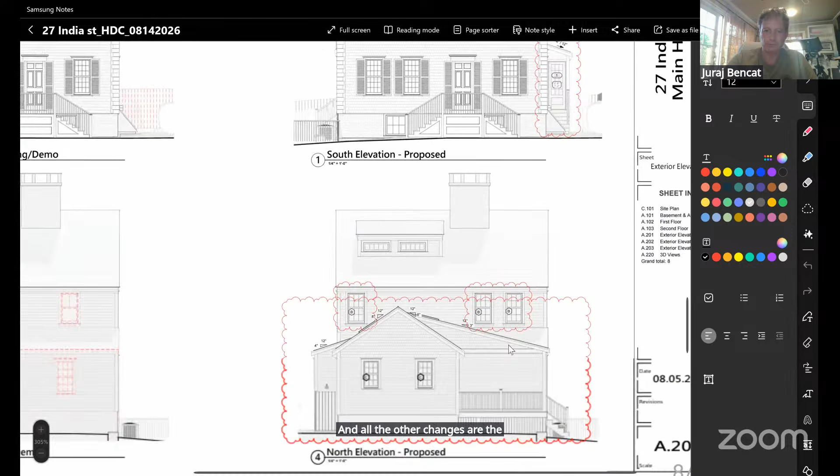I'm sharing my screen. After last meeting, I was supposed to update the existing and proposed elevation, which didn't show the proper size of the second floor windows. So that's what I updated on the plans, and all the other changes are the same as what we proposed last time. The addition in the back, one story with the porch connected to it.

Which is visible from the north elevation from here. We are not doing any changes to the main structure, not removing any existing windows or doing anything else to the main structure. Just changing interior partitions at some point, but the main exterior addition is in the back, one story. I think that's all for now.

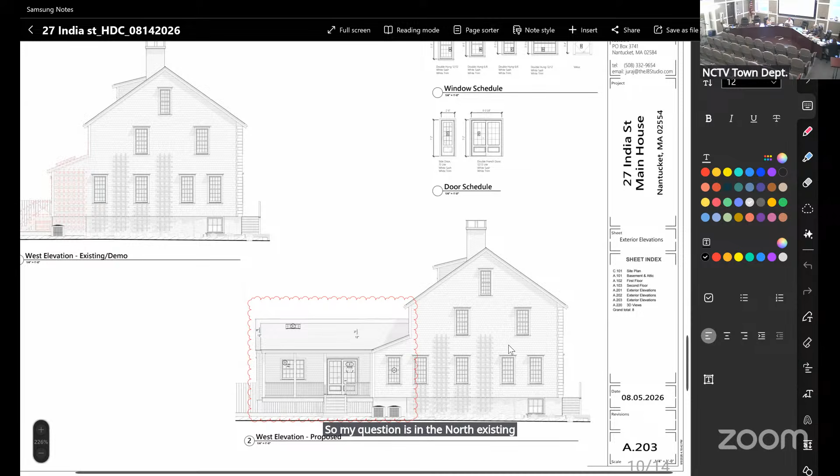Thank you, Juraj. Does anyone have questions? If not, I do. So my question is, in the north existing demo, there are 2 second-story windows that are highlighted as being demolished along with first-story windows. Are those historic windows? Is that part of the main block? It's on the second floor.

Yeah, those are like 2/1, not matching the 12/12 existing windows. So those are newer ones which were added there later, and also the first floor are like 6/6. So those are not as the windows as the rest of the structure.

So you said that the second floor windows are in the main block and those are historic, but they are 2/1s. And the ones on the first floor, those are 6/6? They are all different. 6/6 existing, 2/1 on the second floor, and the rest of the structure is, as you see, 12/12 on all other sides.

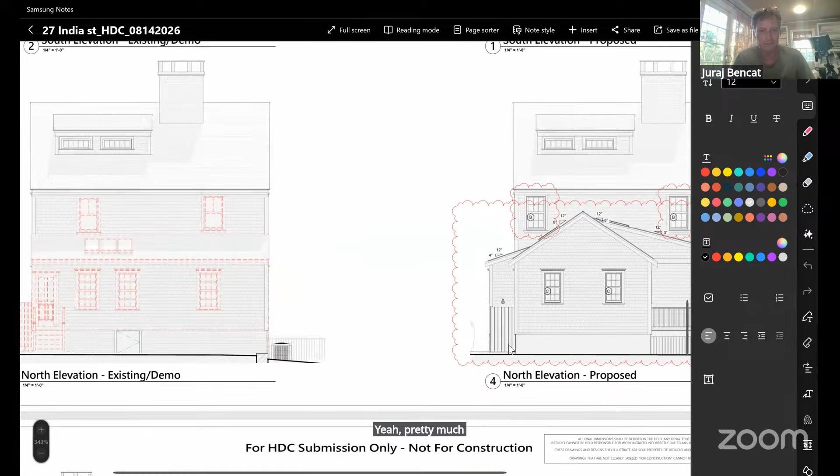Okay, thank you for that, Juraj. Yeah, these north elevation windows are changed, but we are pretty much extending it, not touching the other 12/12.

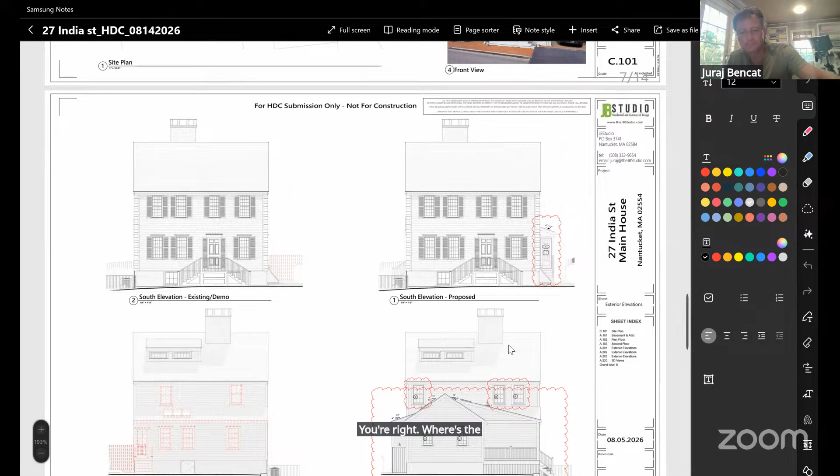Next step. It's east and there is west. Can you back up to the east please? Okay. That's it, that's all I needed to see.

I'll make a motion to approve as submitted. Oh, was there Mr.- another? Chair. Hang on, I haven't commented yet. Oh, I'm- yeah. Thanks, Abby. Holly, would you like to add anything?

Thank you, Mr. Chair. Just before you all make any motion this evening, one, to your point about the windows, I would recommend having a window survey. They are on the main block. Obviously, 2 over 1s are more of a contemporary, but rightfully so, I think that would be appropriate again on the main block. And then two, this addition is sensitive. It's on a 1794 historic, individually significant historic resource, and a historic determination will more than likely be needed from the building side. So I would highly recommend that be part of the motion if you're all so inclined.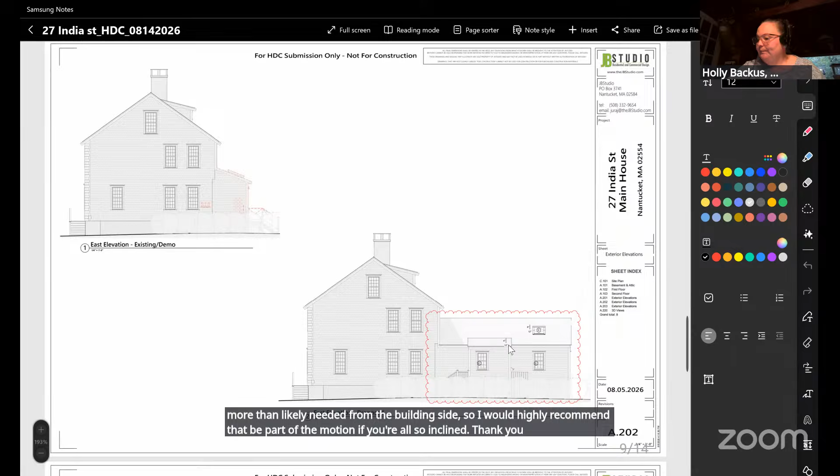Thank you for that, Holly. Yeah, that was going to be my only comment, was just retaining as much of the original material as possible, but most likely these 2 over 1s were later additions because they wouldn't have been typical of this original construction. Is that right, Holly? That's what I was thinking too. You wanted the historic determination added to the approval? And the window survey? Yes.

Anything else? It's your motion. Well, that's what I propose. That's my motion. All right, on your motion, I'm an aye. Stephen, aye. Ray, aye. Connie, aye. And I'm an aye as well. Thank you, Yuri, thank you.

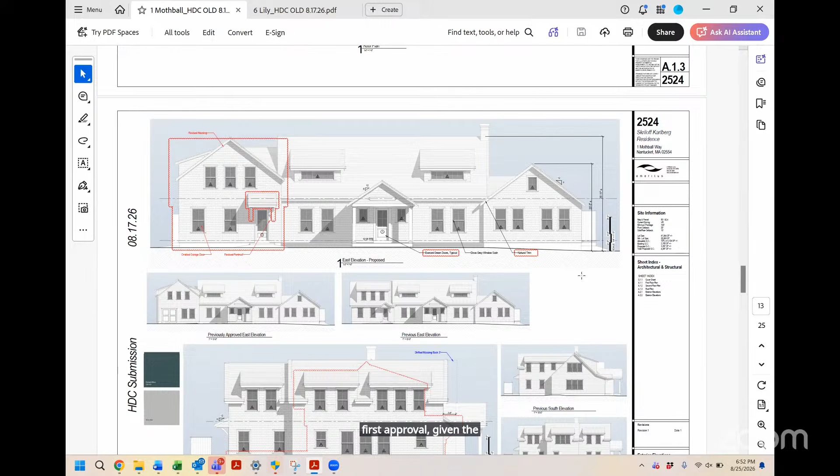Well, I could go. This is Joe. I appreciate the reversion back to this, and I think this is more appropriate even than the first approval, given the garage doors are gone from view. So that's all. Thank you.

Thanks, Joe. Who would like to go next? I can go. Go ahead, Abby. I agree with Joe. Approve the changes.

Stephen or Connie? Thank you, Matt. Appreciate the changes. No concerns. And Stephen? There being no dissents, I'll make a motion to approve. None from me. Motion to approve is submitted.

Thanks, Matt. On your motion? Aye. Abby? Aye. Ray? He's not on it. Oh, sorry, Joe. But I'm an aye. Oh, great. And I'm an aye as well. Connie? Aye. Great. Thank you.

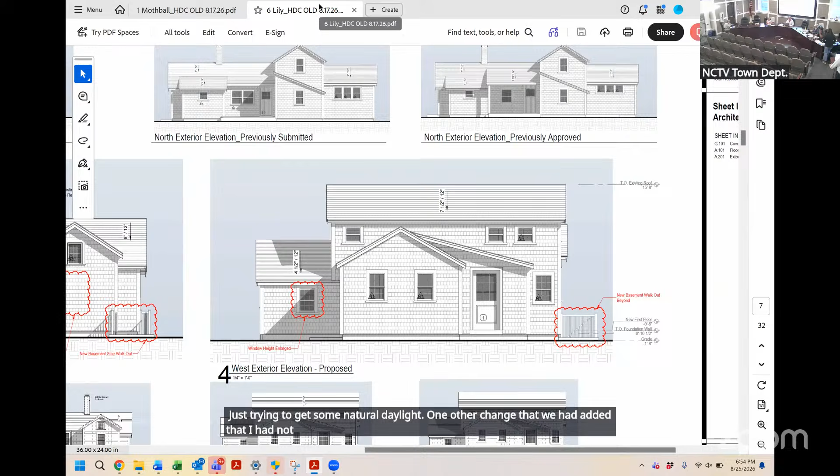We're also back for the slightly larger windows, which fall in the kitchen. Again, just trying to get some natural daylight. One other change that we had added that I had not asked for in the previous submission was the addition of a walkout. I'm just going to scroll to the site plan so you can see where that is. It's basically a walkout to the basement. It's towards the back of the property. You can see in the site plan here, it's in this back right corner.

So that's an addition. I don't think that's going to be highly visible. A majority of it is obstructed by the massing of the building. And we strategically placed it there so it was as far away from visibility as possible. We obviously also asked for a larger French door in the rear, but I didn't feel like there was a lot of aversion to that from the board. So with that, look forward to comments from the board, Mr. Chair.

Thank you. Thank you for that, Matt. Does anyone have any questions? All right, who would like to begin? Matt, these are the only two changes you're proposing?

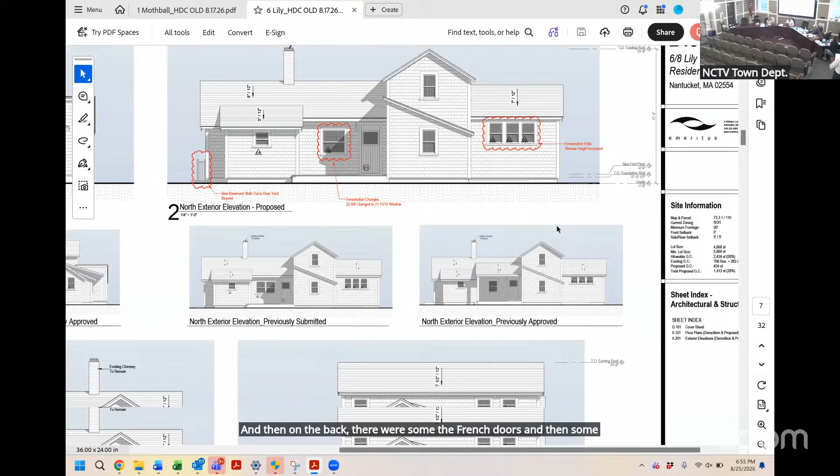There's a number of them. There's on the north elevation, which is a street elevation, there's the window, there's the kitchen windows that were requesting to be slightly larger. You can see that the walkout is slightly visible. Again, that's pretty far from the road. And then on the back, there were some French doors and then some minor window changes that we had just added.

So it's a few, but none of those - yeah, so the French doors I want to comment on, I think on the north elevation, right? Yeah, the windows, I appreciate what you're trying to accomplish, but the triple gang double hungs, it's just too vanilla. For me, I think it'd be appropriate to replicate proportionately the window to the left of the front door and then just tack a small window like that's there on it. So you have a big window and a small window, either 6 inches from it or literally on it. These are these kind of quirky details of this cottage. I think it would be consistent with the vocabulary in either instance.

On the French door, is it actually a French door if there's only one of them? Well, there's two. Go to the next sheet. And what do they call French doors in France? I've always been curious about that. It's actually two in the back. It's a double? Yeah. Oh, okay. Oh, yeah. Okay. No, there you go. We're not going to see this? No, unless you're trespassing. Well, I wouldn't put past it. From a public way, no.

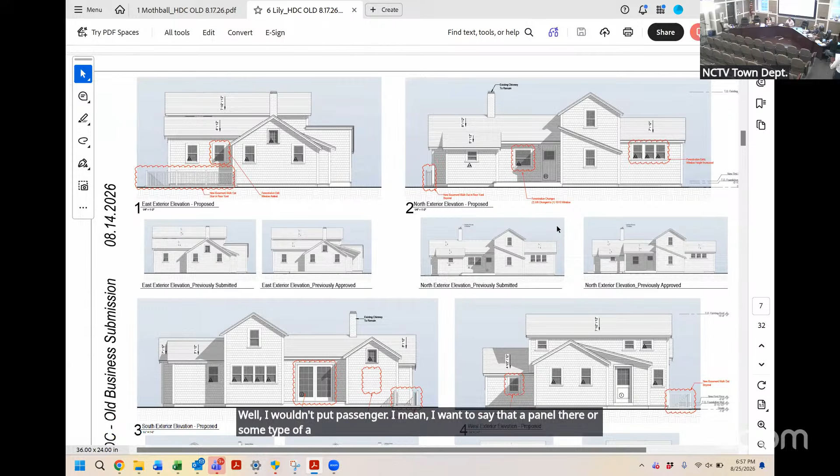I mean, I want to say that a panel there or some type of a modification would be more appropriate. However, we're not going to see it, so I'm not going to comment on it. We even could do though a panel. Yeah, we could do a panel. Thank you, Matt. Thank you, Mr. Chair. Thank you. Who would like to go next?

This is Joe speaking. Thanks, Joe, go ahead. I appreciate the concession of doing the panel on the French door. I think that is appropriate.

I didn't quite understand Stephen's description regarding the triple. I don't have a concern with it as is, and no other concerns. But Stephen, through the chair, if you don't mind, could you clarify what you were saying regarding the triple window on the front elevation, the north?

Yeah, sure. So the window to the left, the double hung window to the left of the front door, the 10/10, the 20 light. If that were downsized to fill the space of two of the triple and used in place of two of the triple, with either the third triple appended or separated by 6 inches, I think it would be more appropriate.

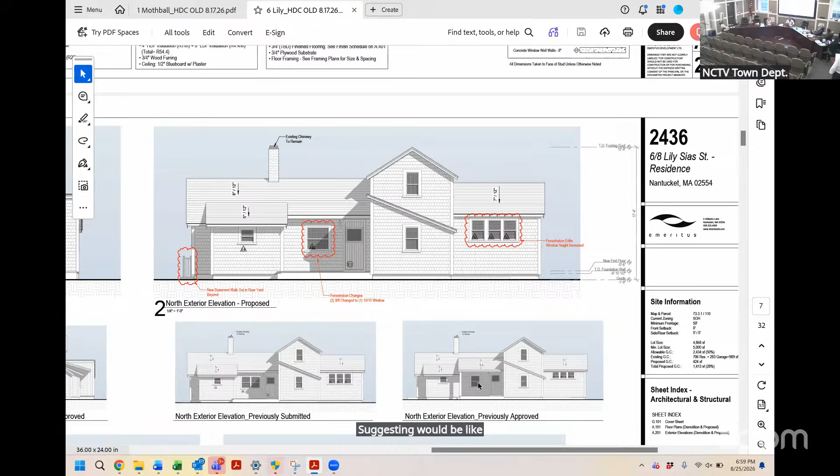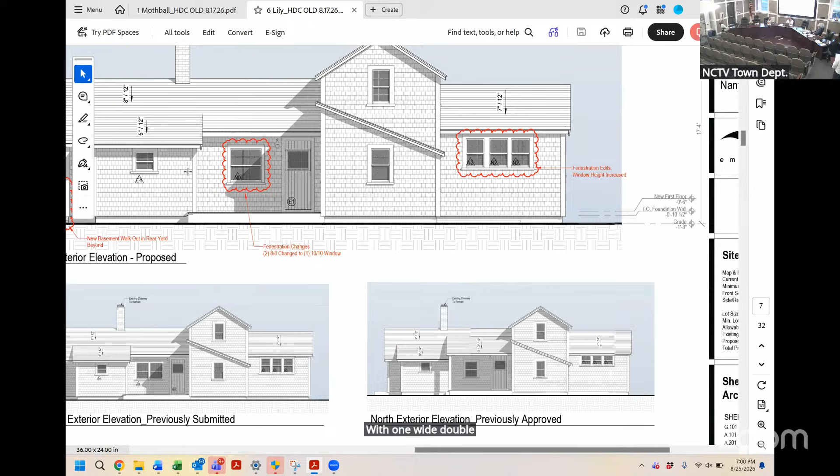I think, well, let me see if I can say it the same way but differently. I think that the triple double hung package is appropriate to a typical Nantucket home. I don't think it does this cottage justice. I think the vocabulary of the fenestration to the left of the tower, which is varied, is the character of the structure and beneficial. I think a portion, two of the triple double hung, could be replaced with one wide double hung window and either have it be the wider with a smaller one directly next to it, or...

Actually, Matt, I was thinking the other two. Just the way I was thinking, that would be a wider double hung, and then you could have the single next to it, adjoining it, or 6 inches away. I get what you're saying. Yeah, me too now. Okay. I just think it would be more becoming to the structure, that's all.

Okay, thanks for that clarification. Well, Joe, back to you. Oh, really? Yeah, well, I generally understood that you wanted to make this more eclectic to the right of the tower, and I don't disagree. Now I understand what you were talking about, so I support that direction. Thank you.

Thanks for that, Joe. Holly, your hand is up, do you want to say something? Thank you, Mr. Chair. Yes, just on the topic of what was also proposed — Matt had mentioned the walkout basement, which was added in between the last review and the revisions. One, it's not reflected on the COA, so should the board be so inclined, it needs to be updated on the COA. But also, more importantly, that walkout basement, based on what I see on the plans, includes a 1 foot 4 inch move of the structure further in that direction to accommodate it. So I just want to bring that to the attention, that it also needs to be indicated on the COA.

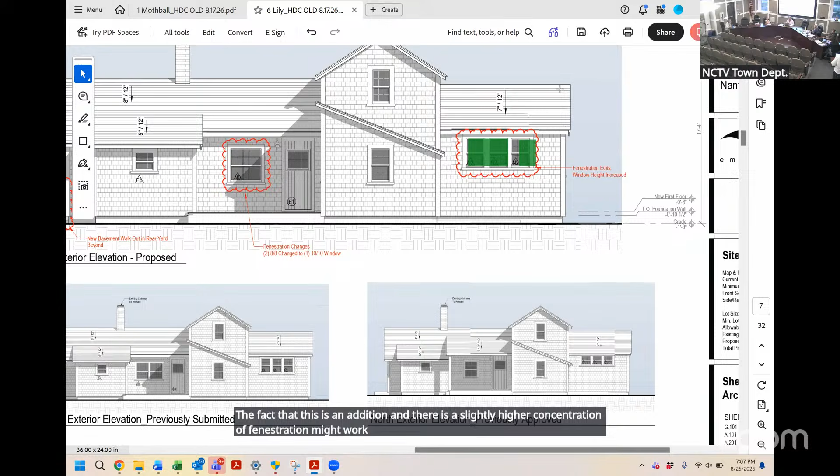But if I could also just add one quick thing, where this is an addition to the Underhill Cottage, which again, I'm a huge fan of and love. The fact that this is an addition, and there is a slightly higher concentration of fenestration, might work in favor of discerning itself from the original. Just a thought. Okay, that's my motion then.

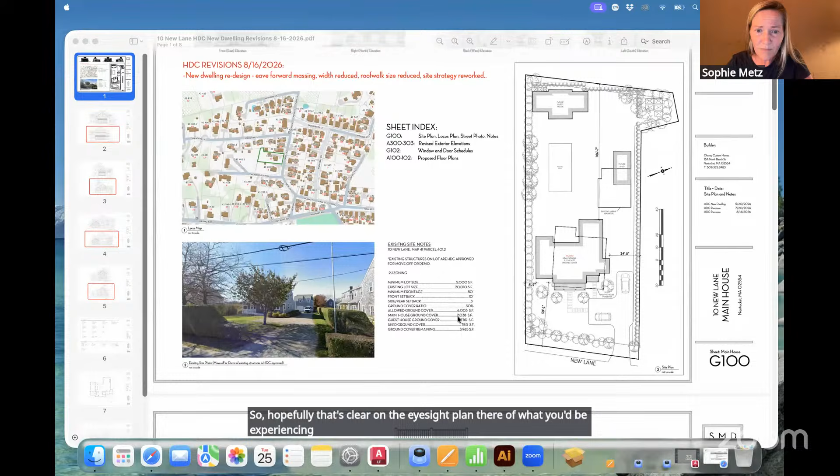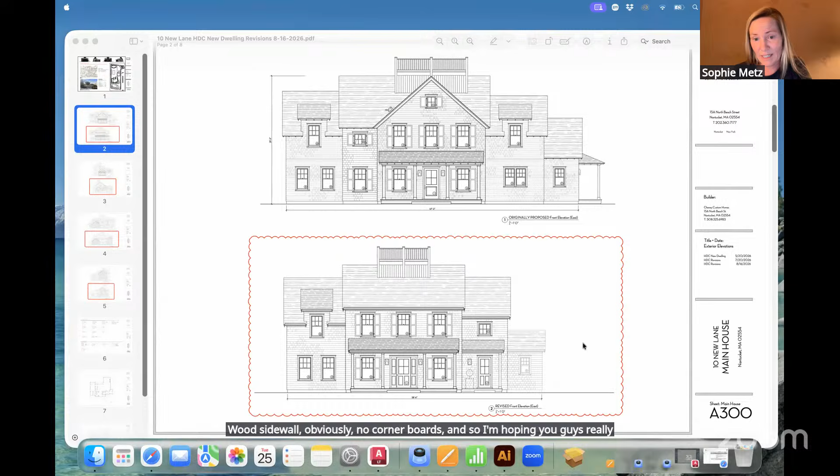So this is what we are coming to now, which is an eave or shed forward, not a gable forward, matching the trim detailing with no rafter tails - very similar to other houses on the street. 6/1 windows, in keeping with the street, a much smaller roof walk on the face. It's being proposed with wood roof, solid wood windows, wood sidewall, and no corner boards. I'm hoping you feel like I listened to you and the clients responded, which is reflected on the site plan - not so different from what they had before. We're 6 inches closer than their old corner had been on the right side. That view corridor is retained. We eliminated the shed being in the front. It does extend on the left side a bit, but it is a brand new house and they were shooting for something larger than what they had before. Hopefully that doesn't offend you.

No offense taken. Thank you.

Okay, Sophie, thanks. What do you think, folks?

I'm happy to go first. Angus, great, thank you so much - God, I feel like I've been heard. I appreciate all the revisions, especially the sense that there's space around the house, even though it's pushed, consolidated to the south property line. There's now a vista that presumably will go back further than it already does as is. So I appreciate all of it. I'm good with this.

Who's next? I can go - I'll say ditto, what Carrie was going to say. Gary, yes, and I think Connie's a ditto too. It's all happening too fast for me, let me take my notes. I'm a ditto as well, and I would also add that I wouldn't object to rafter tails on the structure - I think it's a charming detail, but fine with it as drawn as well. Thanks.

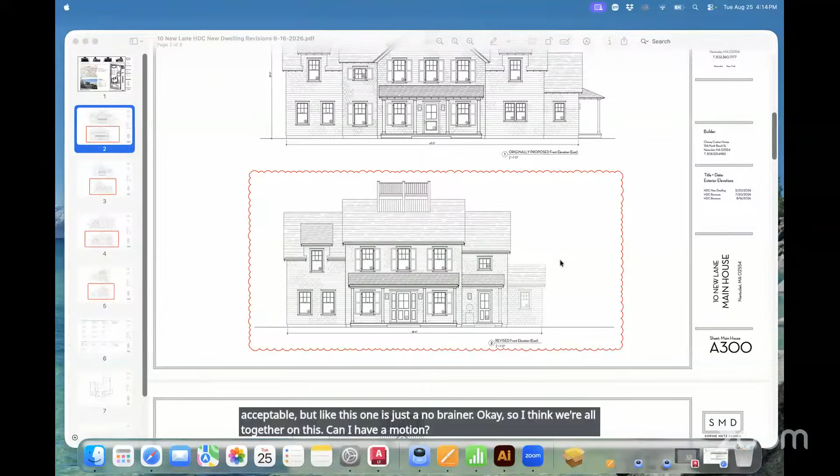Okay, so I think we're all together on this. Can I have a motion? Motion to approve with rafter tails if so chosen.

Okay, if chosen, what do you think about that, Sophie? That would be great, thank you very much. But I don't think they want them at this point based on the change. She's only suggesting it as an option that you can choose or choose not to use. Okay, great, thank you. So that's Carrie's motion.

On Carrie's motion: Angus, aye. Connie, aye. Joe, aye. And Carrie, aye. And I'm in favor. Thank you guys so much. Okay, great, thanks a lot.